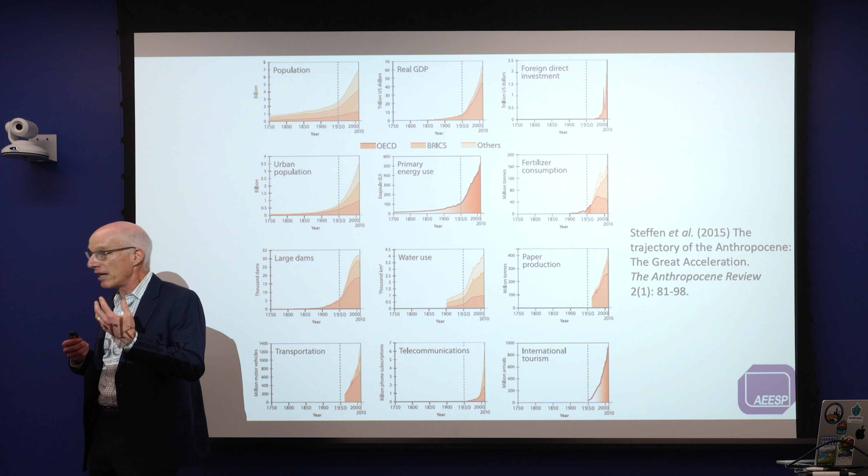But in the period in the start of the second half of the 20th century, we saw the pent-up economic growth, the technology development of the Second World War bloom. And it led to tremendous increases in global population. It led to the Green Revolution and food production. It led to technological advances, and it led to higher standards of living around the world.

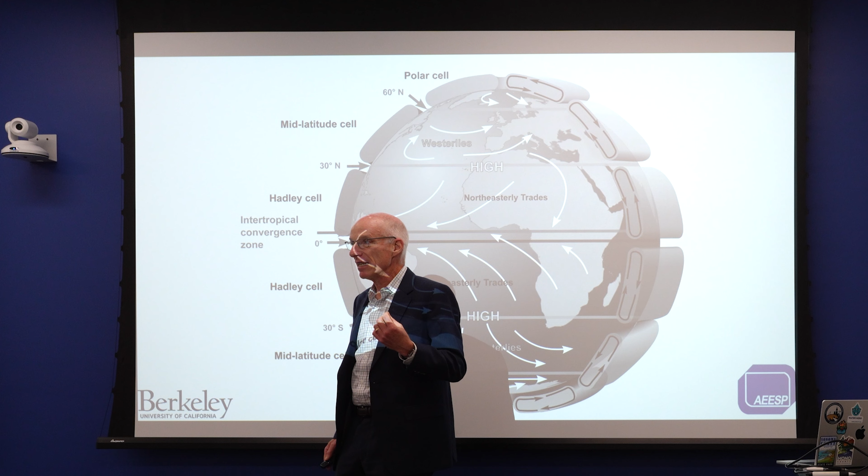And these 12 images from a wonderful paper that came out all the way back in 2015 is something that maybe should be in every introductory environmental engineering class, because it shows you what some of the drivers are. But what I really like about this particular version of these figures is it shows the fraction of it coming from the OECD countries, the wealthy countries, the BRICS, Brazil, Russia, India, China, and South Africa, the ones that have recently undergone economic development, and the rest of the world.

And I think it's important to think about this for many reasons. For example, our field of environmental engineering developed when the Great Acceleration was really at its peak in North America and Western Europe, when we were building tons of treatment plants and the populations of our cities were growing.

Now they're flatter, and we have to plan maybe for population decreases. Likewise, the BRICS have undergone a lot of that growth, and it's slowing down, and we can see that coming. But now we have this development in the rest of the world. And when it comes to water challenges, that has a pretty major implication, because the way in which our cities grow today is much different than the way it grew in the past.

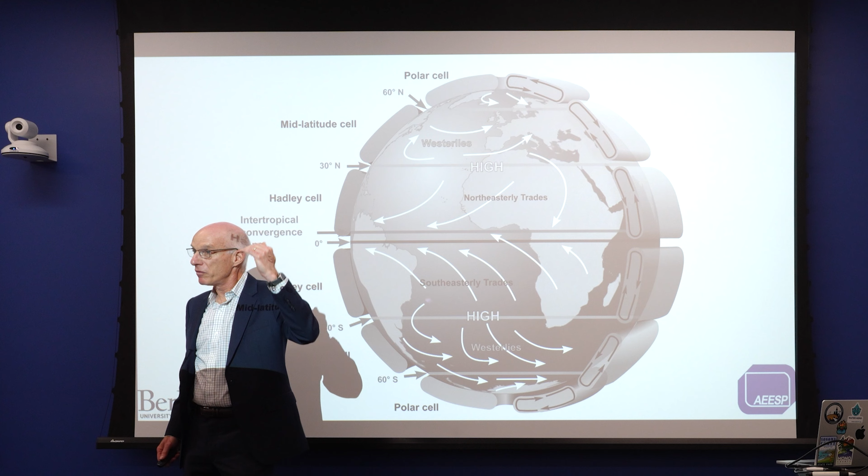For example, in the 19th century, London was the fastest growing city in the world, and it was doubling about every 40 years. In the middle of the 20th century, Los Angeles was one of the fastest growing cities in the world. It was doubling every 30 years. Today, the 10 fastest growing cities in the world are all in sub-Saharan Africa, and they're doubling at a rate of about once every 15 years.

And so if you think about what it takes to build water infrastructure, maybe 40 years or 30 years you could wrap your mind around. Now imagine the idea of doubling a city's water infrastructure in 15 years by putting in treatment plants and pipes and the kind of centralized model that we've used for all these years. Maybe it doesn't work the same anymore. And maybe we need a new approach, not just copying the approach that worked during the great acceleration in North America and Western Europe and the BRICS.

The second driver is climate change. When I was a student, when I was in your position in graduate school, we knew that climate change was coming, and we had a vague recollection that things would be warmer, but we really didn't see how it would manifest itself, especially with respect to water resources, until the last decade or so. And so maybe you've heard that idea, the wet places get wetter and the dry places get drier.

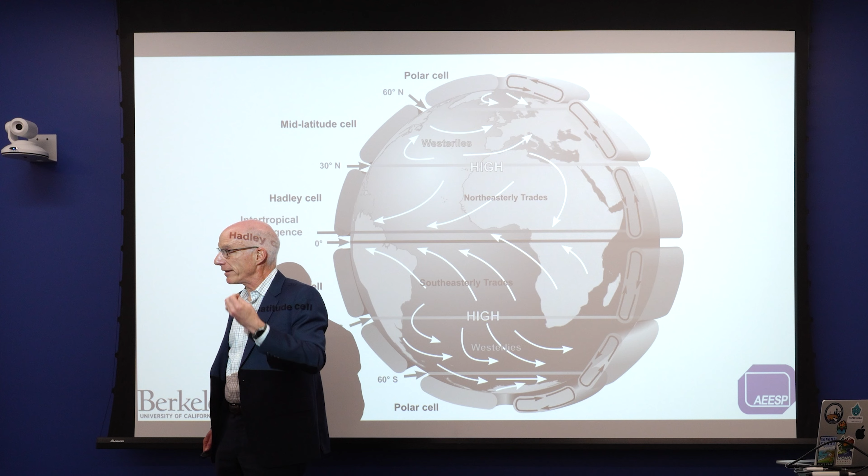Well, the thing that maybe brought it home to me was this junior high school drawing of the Hadley cells and the global circulation around the planet. You probably saw this in your first earth science class at some point. Remember that the solar radiation is greatest near the equator. We get the most evaporation of water. The moisture comes up at the tropics. That's why we have tropical rainforests.

It goes up into the troposphere, it drops the water, and it comes down at about 30 degrees north latitude and 30 degrees south latitude. That's why the great deserts of the world, the Sahara, the Sonoran, the Kalahari deserts, are at 30 north and 30 south. And as the planet warms, the width of the Hadley cells expands, and it gets drier in these places, or the deserts start shifting up in the northern hemisphere and down in the southern hemisphere.

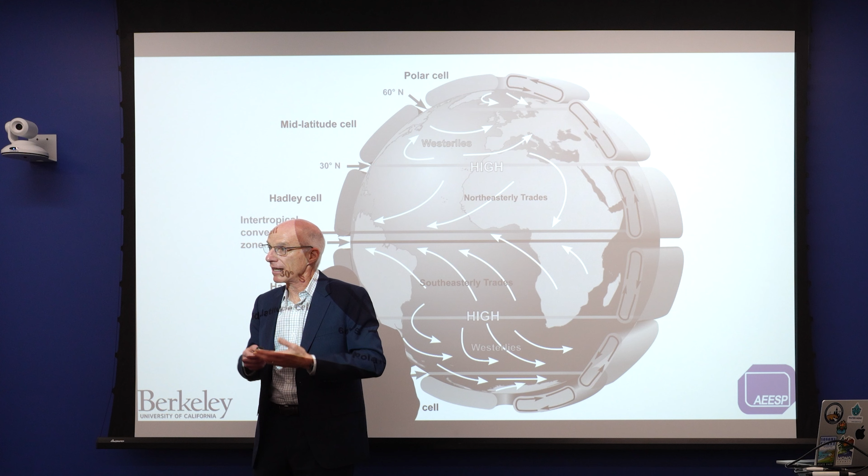So the climate of northern Africa is going to be the climate of the southern Mediterranean, and we already see it drying out. And the climate of northern Mexico is going to move into southern and central California and the American Southwest. And in Australia, the desertification is going to move the dry zones further and further south.

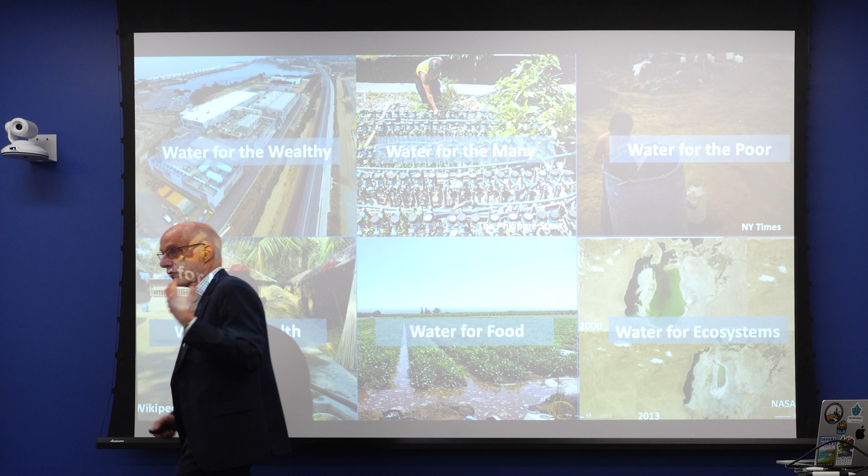Now, where this really started crystallizing in my mind was the situation in Perth, Australia, where in addition to the expansion of the Hadley cells, they've had changes in their ocean circulation patterns that have led to a reduction in precipitation sooner than in other places. So in Perth, they've had about a 15 or 20% reduction in rainfall relative to pre-development times. And that's more or less what we expect to happen by the year 2050 in the other areas on the edge of this climate zone where the Hadley cells come down.

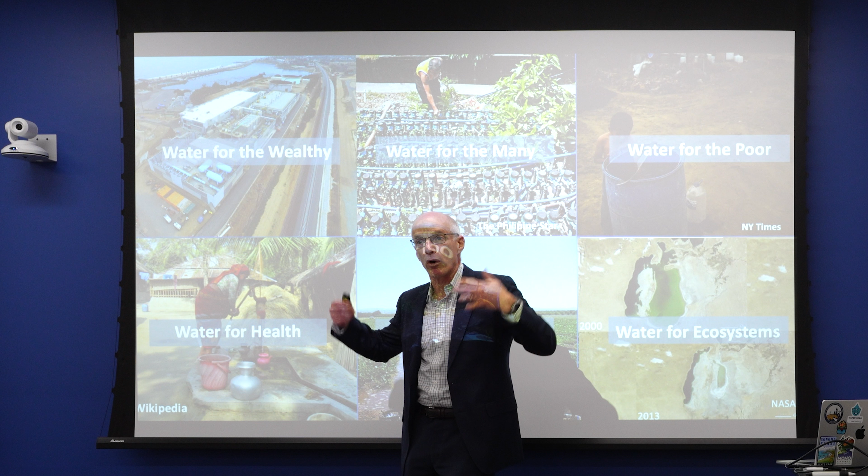But they've seen much more than a 20% reduction in water. They've seen in excess of a 50% reduction in the amount of water coming into their reservoirs. Because in addition to less rainfall, you have drier conditions, and with drier conditions you have higher rates of evaporation, and less of the rainfall that lands on the watershed makes it into the reservoirs. And when it gets warmer, the drying seasons get longer, and you get more evapotranspiration over a longer period. This general phenomenon we refer to as aridification, the thing that's behind the shrinking of the Colorado River here in North America. And so we can see the future happening in Perth.

And Perth is a very different place now than it was 30 years ago in terms of its water resources, because it no longer relies upon surface water. It relies upon seawater desalination and water reuse for the lion's share of its drinking water supply. So there's something big happening, and it's driving our field, and it's coming to us.

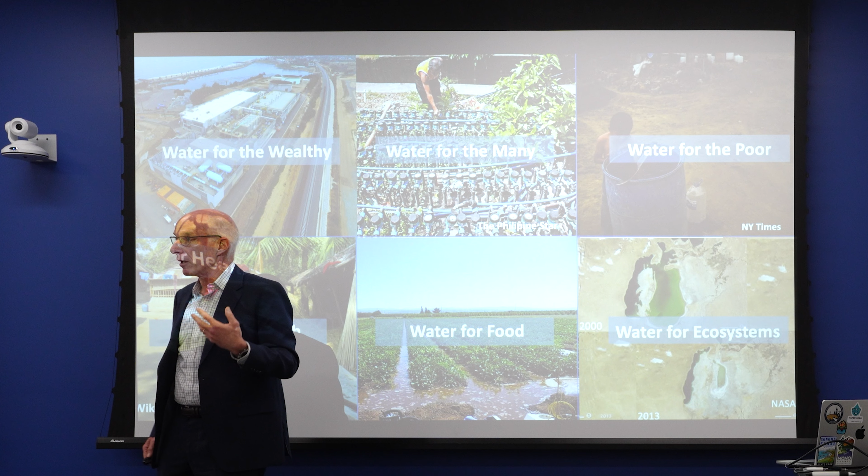And I've been thinking about what it could mean in terms of water challenges or water crises, and I really came upon this idea that when we think about water, we run from crisis to crisis, because when I think about how water systems change, they change in response to crisis, and that was really the lesson from Water 4.0.

So when I sat down to write Water for All, I thought about the 6 water crises, and the book is oriented around these 6 different water crises that we face, and they're driven by the great acceleration and climate change. But the institutions that deal with them, the technologies and policies we use in response to them are all somewhat different. So it's more helpful not to think about one global water crisis, but to think about 6 separate crises.

I don't have time to talk about all 6 today. I've chosen for this lecture to focus on drinking water and water supply, but I just want to review them quickly to give you kind of a teaser for it. So the top 3 are all about drinking water.

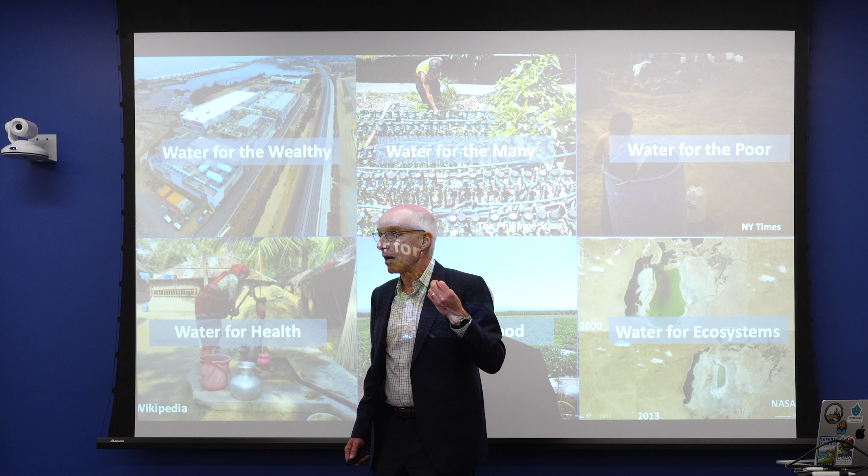Water for the wealthy, that's a picture of the Carlsbad, California, the San Diego seawater desalination plant, the largest desalination plant in North America. So when rich people run out of water in their cities, they call a multinational contractor and they build a desal plant, or they build a new reservoir, or they build a water recycling facility.

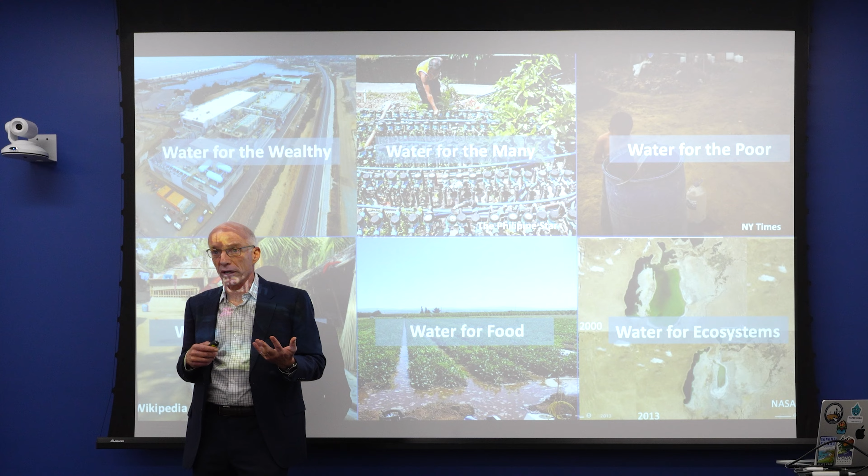Water for the many, this is a picture of a series of valves in Manila in the Philippines. Many of our cities, the majority of people who live in cities are served by piped water, but the piped water is both unhealthy to drink and not always available. So this is a water technician turning on and off different zones of the distribution system because they don't have enough pressure to pressurize and send the water around 24 hours a day. And this leads to a series of economic challenges as well as supply problems.

And finally, water for the poor. It's a picture of a child dipping water out of a barrel in Mexico City, where they have water scarcity in their informal settlements, but you see this problem play out all over the world, probably as much in rural communities as in cities, where people don't have access to piped water, so they spend a lot of their time, a lot of their money acquiring water. Mostly I'm going to talk about these 3 today.

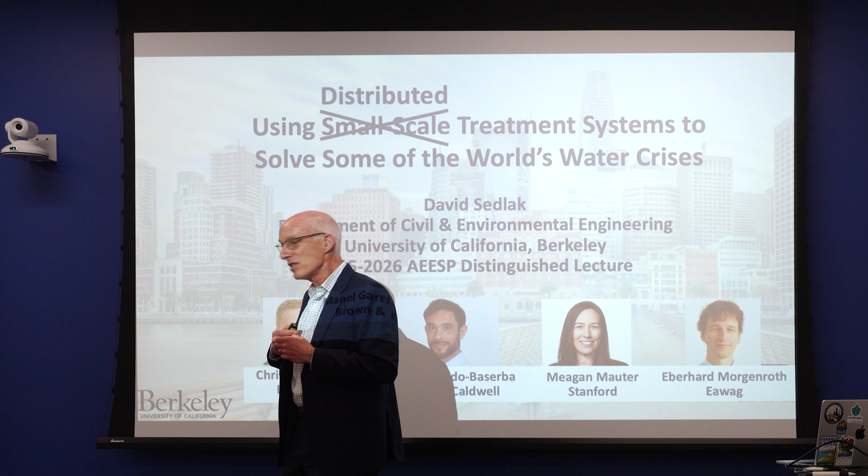The other ones, water for health. There's a woman pumping water out of a tube well in Bangladesh. You probably know about the global mass poisoning with arsenic as a result of a well-intended public health effort to reduce exposure to waterborne pathogens, which has people drinking arsenic, but it's not just people in low-income countries. There's plenty of people in wealthy countries who have unacceptably high levels of arsenic and nitrate and other chemicals in their drinking water.

Water for food, as a result of the continuing momentum of the Great Acceleration, we're going to have to produce 70% more calories by the year 2050. And so we're going to have a need for a second green revolution to increase productivity of food, and we're going to do it on more or less the same amount of land. There isn't much more farmland to clear around the world to feed all the people and to have people live at a higher place in the food chain eating more meat. We're probably going to do that by increasing the amount of irrigation and intensifying agriculture.

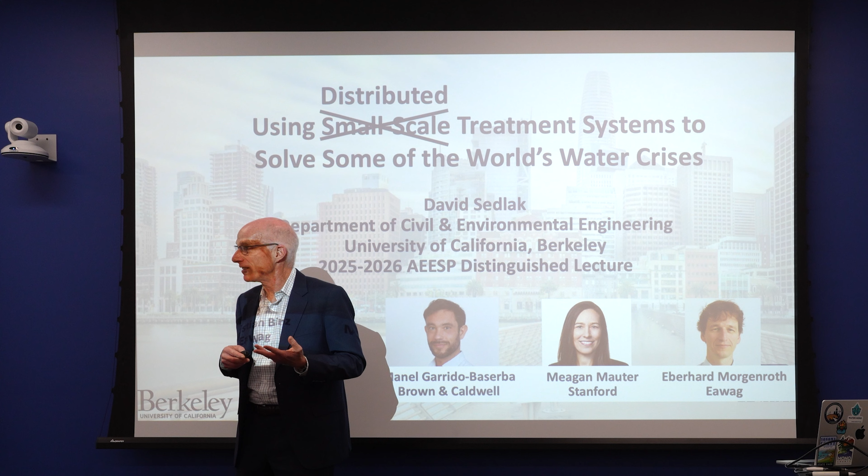And finally, nature always bats last, so here's a time-lapse series from NASA of the Aral Sea drying up. Because when we start routing water for agriculture, when we start sending water for our farms and our cities, we tend to dry up lakes. A terminal lake is like a worst case scenario where you can most easily see it, but many of our streams and rivers are heavily degraded as a result of our failure to be good stewards for water.

And so each of these is a crisis. And there are people and ecosystems and institutions grappling with them every day. And that's really the space we as environmental engineers inhabit when we think about water. But today I want to talk just about a smaller section of this.

And I want to talk not about the problem, but about one set of potential solutions to the problem. And it's this issue of small-scale treatment systems. And to help me with this, like I told you before, I recruited some co-authors for the paper. And the first thing my co-authors said is that I had the wrong title. So you can see why this paper is taking a long time.

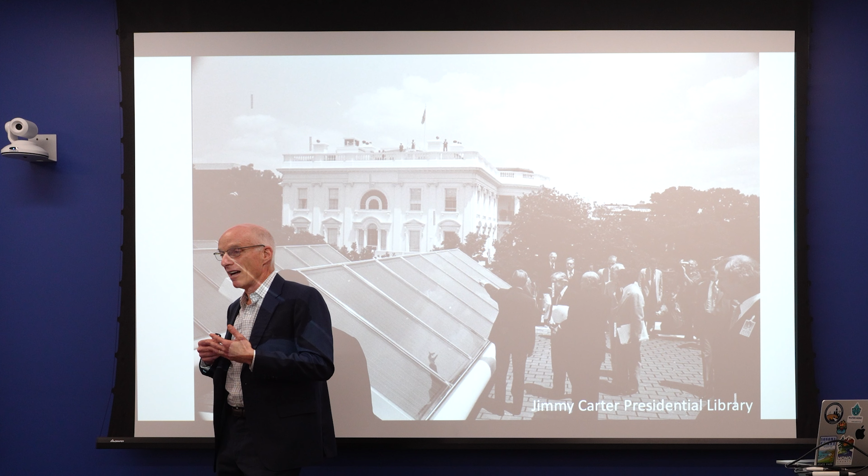My co-authors shown here convinced me that it's actually distributed treatment systems. So I'm not talking like small scale. Scale is not the issue. It's this idea that we can distribute treatment systems around our cities and not rely upon this model of a centralized wastewater treatment plant and a centralized drinking water treatment plant, but we can build water recycling systems in the basements of our buildings, in our homes, in small residential developments that people start, and that this could be part of a solution, not the only solution, but a new solution to water scarcity.

So my co-authors: Christian Binz, a social scientist at Eawag, who I've worked with in the past on issues of public acceptance of potable water reuse. Manel Garrido-Baserba, he's currently at Brown and Caldwell, but he had been at the University of Verona. That's where I met him. He's a great modeler. Meagan Mauter, Nick's former advisor at Stanford, and Eberhard Morgenroth, an engineer from Eawag also, who does a lot of this work. And these have been my partners looking at this and working on it and thinking about it. And the reason it's taking so long to write the papers, we're having so much fun doing it. So I don't mind that, but at some point it's got to go.

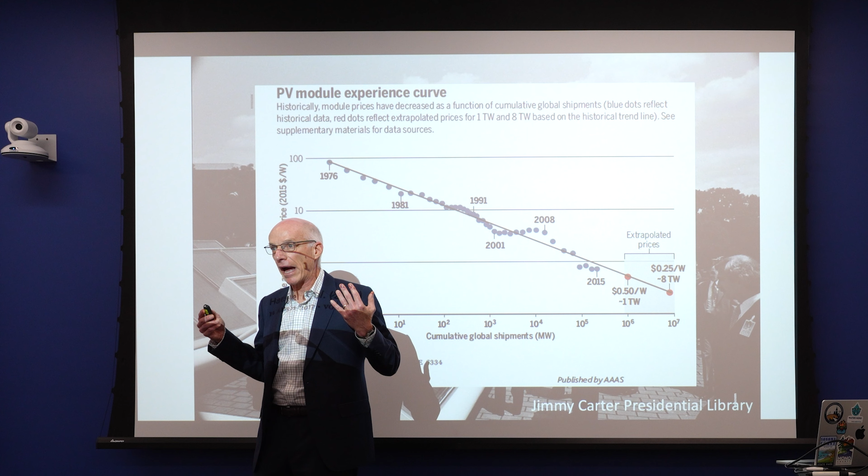Okay, so I'm going to take you someplace now where you probably didn't expect me to go. It's the roof of the White House. And maybe you can recognize from the clothing that this is not the current White House. You could probably also see the West Wing there. This is the White House circa 1976. And in front of you is Jimmy Carter, and he's pointing to his solar panels. Very proudly, his solar panels that he's put on the roof of the White House, because Carter recognizes that the key to national security is breaking our reliance on oil.

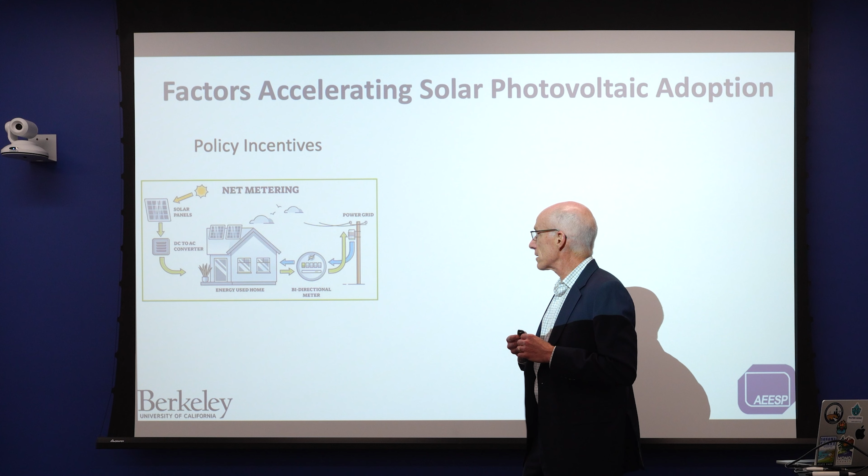He has some inkling about climate change. He realizes that having an alternative, non-fossil form of energy might be a good thing for the country, and so he pushes this. Now, because people don't like someone who seems like a Puritan who asks them to make sacrifices for the better good of the environment and the nation, he loses the next election to Ronald Reagan, who takes the solar panels off the roof of the White House. But Jimmy Carter has the last laugh, because between 1976 and I guess 2017, when this paper came out in Science, the price of solar electricity dropped by a factor of 50.

And this phenomenon that with new technologies, when they first come out, they're expensive, but as they develop and more units are built, they drop in price due to something called learning by doing and economies of scale. And this is something that if you went to business school, you'd hear about all the time. It's called Wright's Law. And Wright's Law says that as we build more of something, as we gain more experience, it gets easier to do and it gets cheaper to do.

And I would like to suggest to you today that some of the things I'm talking about, these distributed water systems, which today might seem a little far-fetched to you, or might seem like they're not economically attractive. First of all, I'll tell you that they're already economically attractive. But they're going to get cheaper and cheaper and cheaper. And the conventional way of doing water that we've done since the beginning of the Great Acceleration is not going to get that much cheaper. So it's going to win in the long run.

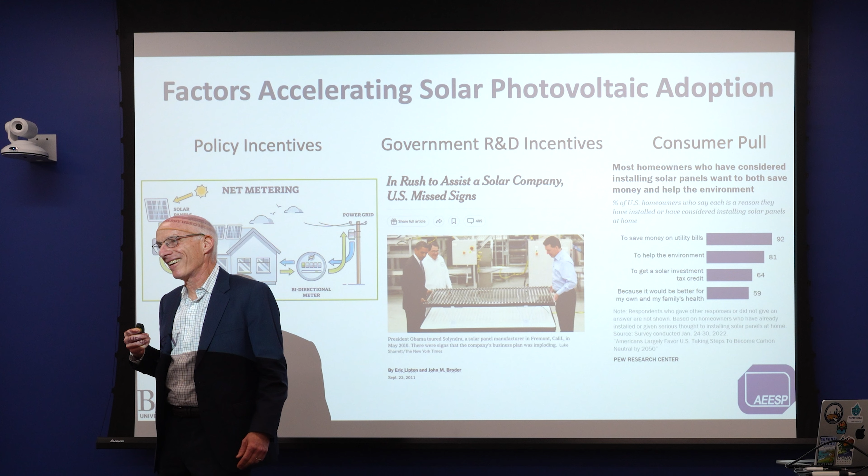But I also want to help you to think about something that maybe we don't teach our environmental engineers enough. And this idea that when you think about change, you have to have a theory of change, and you have to be a little bit of a student of change, and you have to think about how it happens. And when you look at something as complex as energy or water infrastructure, you got to be a patient person, because this takes a long time. Let me tell you something about solar panels, some of the ideas underlying that figure.

We made solar panels happen for a variety of reasons beyond just the technology. So if you thought that the reason that solar panels got cheaper was that the efficiency of the photovoltaics improved over time, that's a very small part of the story. We did things like having policy incentives like net metering, requiring utilities to accept the electricity that consumers generated and paying them for it. In Germany, we had the Million Solar Roofs project, which encouraged people to put solar on top of roofs, and that had a big impact.

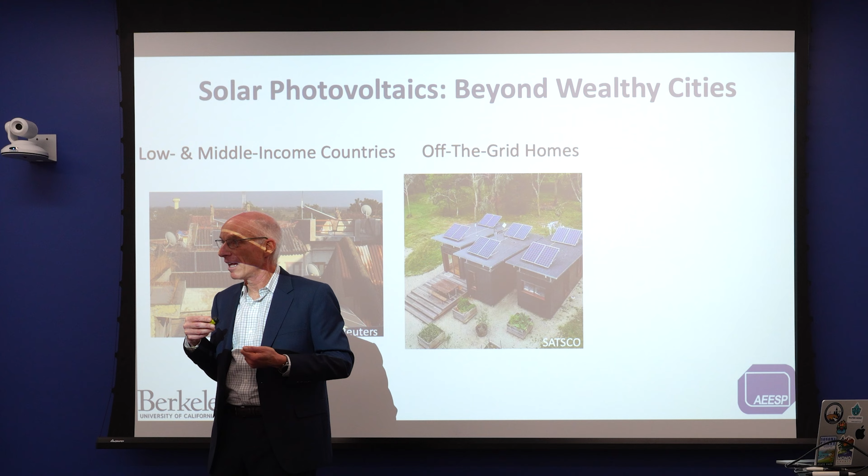We also engaged in something called subsidies. So we subsidized industries to grow them. The one that I recall most starkly is the one that President Obama got in trouble for. It was the US DOE loan to a company called Solyndra that went out of business. And he was given a lot of grief over it. But the idea behind that program was to create an industrial policy in the US that would subsidize the development of solar photovoltaics. Maybe Obama failed, but the Chinese government succeeded, because they built an industry that builds cheap solar panels and solar photovoltaics now that makes it possible.

And then finally, once the consumer sees what it's like to have solar on their roofs, they want it and they want more. So this is from the Pew Research Center, and they surveyed Americans about solar panels, and they're totally into it because it feels good. How many of you have solar at your house? I knew you'd have solar. I have solar. I was cynical for years.

I would tell my wife, look, we've got to get insulation and new windows and do all of the things that we need to do before we do this showboating thing of putting solar panels up. But man, the week our solar panels went up, I was so proud every time I went home and looked at them, and I looked at the metering thing coming out. So this is like the human behavior of feeling good about producing your own power and not being part of a system that might be bad for the planet.

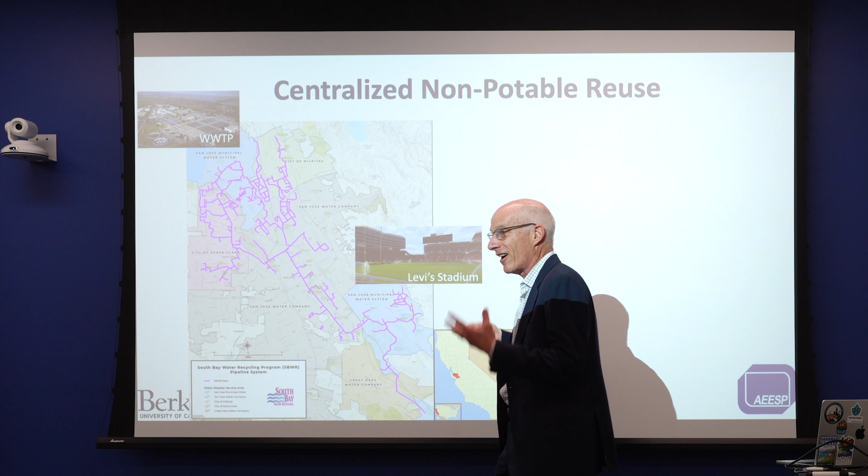But it has impacts beyond wealthy cities. So if you go today to low and middle income countries, you'll see that people have repurposed their solar panels. I have a friend who teaches at American University of Beirut, and if you remember when the fertilizer factory blew up and the electricity plant stopped working, no one had electricity. Well, he built a solar array on his roof and made a microgrid for his apartment. And now most of the middle income and upper income people in Lebanon have their own electricity without a utility, but through this distributed system.

So these things get repurposed in ways that not just make sense for wealthy people living in wealthy countries, but make sense for people who have infrastructure that can't serve their needs. The whole movement towards off-the-grid homes. You've seen maybe the last few weeks these articles about balcony solar, that you can just plug it into your house and produce your own solar. If you haven't seen it, Google balcony solar. You'll see that this stuff is getting smaller and smaller and cheaper and cheaper.

And then finally, human ingenuity, because people are very creative, and once these technologies exist, they'll find new ways to apply them, whether it's a school child reading at night because they're able to charge a battery and have a light at night, or making a little business out of charging people's phones. You just can't imagine the ways that technology gets repurposed.

So let's turn it around and start thinking about water. Now, I want to give you a little bit of a primer on water recycling, because I'm thinking about water-scarce cities and how they're going to get water in the future. And if you look at the history, or you look at what most engineers think right now, they would tell you that the way that we do this is we recycle the wastewater from our sewage treatment plants, but we use it for non-potable purposes.

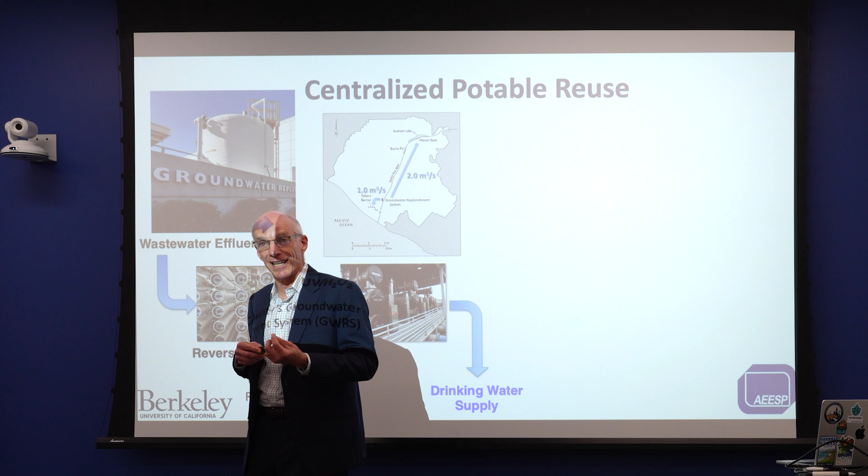And this is a great example of it from near me. This is called South Bay Water Recycling, this project. It's in the southern part of the San Francisco Bay, San Jose, Silicon Valley. You might have heard of the place. And here are the purple pipes. So the wastewater treatment plant is up here on the edge of San Francisco Bay. And this is the purple pipe network that sends the water all around, including to Levi's Stadium, where if you watch the Super Bowl, that beautiful green grass that everyone was bleeding on, that was watered with recycled water from that project.

So it seems like a great way to do it, but it's turned out actually to be a dead end. And the reason is that for this particular project, they had to construct 150 miles of new pipes to distribute that recycled water around. You can kind of see them here. And it only is reusing about 5% of the wastewater produced by the treatment plant. That's because you can't force people to take it.

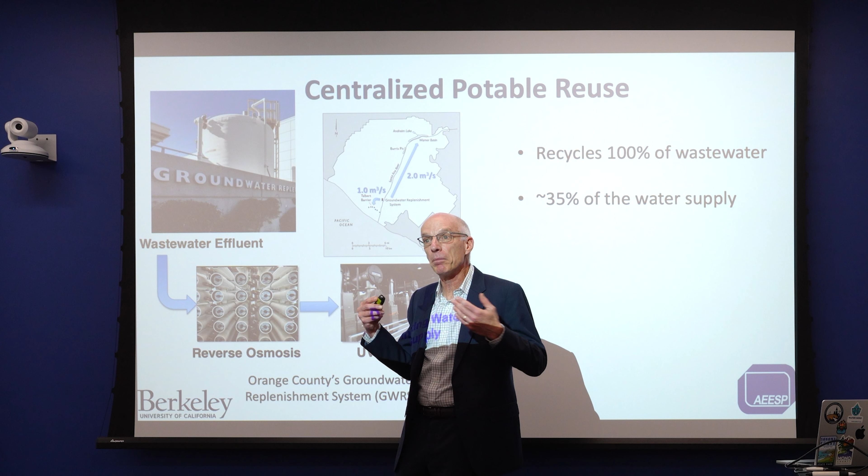The projects where these turnouts are going and all these pipes are going are like office parks and Silicon Valley tech parks and football stadiums and ball fields, but not individual homes. So you have to build a lot of pipes to use the water. So it's in irrigation and industrial usage. And when you look at the cost of the water, they don't like to talk about this, but if you dig deep enough into their material, you can see it's about $1.50 a cubic meter, which is up there with the cost of desalinated seawater. It's pretty darn expensive. So as a result, we're probably not going to see much expansion of this.

So in California, where we've been through this drill of water recycling, very few people are enthusiastic about non-potable water reuse. There's some agricultural reuse, there's some opportunistic things. So if you're a golfer and you get lost and you can't find the golf course, you look for the sewage treatment plant because the golf course is right next to it. But that's because of the proximity, and it makes it easy. You don't need that network.

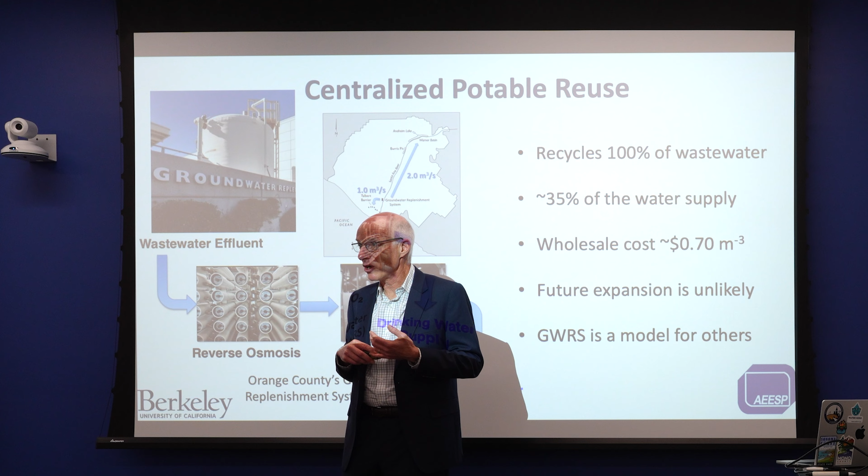So the alternative that's gotten a lot of attention lately is this idea of centralized potable reuse, where you take the treated wastewater from the sewage treatment plant, you put it through ultrafiltration or microfiltration and then reverse osmosis. Then, for good measure, you whack it with an advanced oxidation process, usually UV peroxide, and then you inject it into the aquifer, like in Orange County. This is the famous groundwater replenishment system, kind of the oldest of these systems.

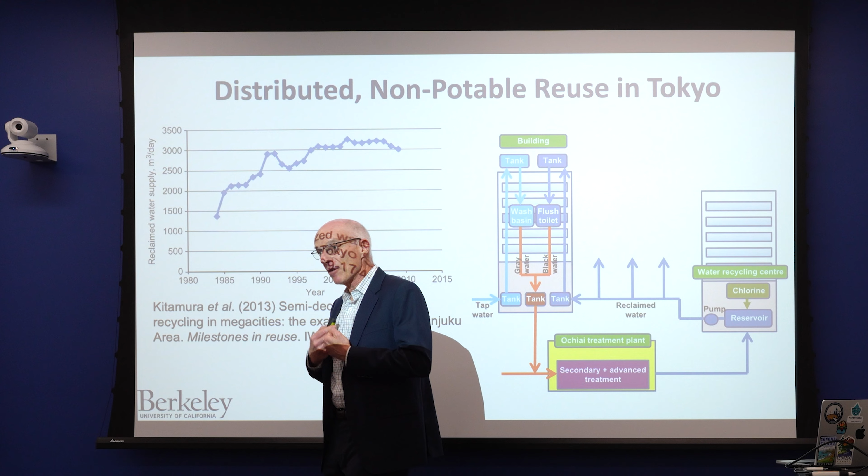It started with a seawater intrusion barrier to push back the seawater that was coming into the aquifer, but some of that water was going into the water supply. And then when they expanded it, they pumped it up to, you can see Anaheim Lake up there, the edge of Disneyland. And they infiltrated it into a lake, and it recharges the aquifer. So if you go to Disneyland and you turn on the tap, you're drinking recycled water, and it tastes much better than the water here at Notre Dame, because it has a low salt concentration.

And that project is quite effective because essentially they've recycled all their wastewater. There's no more wastewater left at the Orange County Sanitation District. They had to build this giant tank, I should have gotten a picture of it, to hold the wastewater that flows in during the day so they could equalize it and run the treatment plant at its full capacity. So every time I see the people from Orange County Water District, they go, do you know where we can get some more wastewater? So this is very successful. And it accounts for about 35% of the supply of people in their service area.

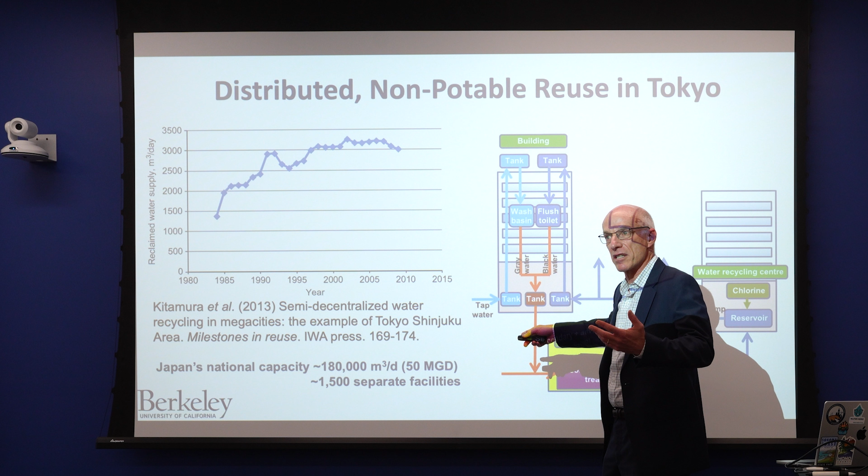Because it's Southern California, people are going to have lawns and outdoor irrigation. So they lose 15% of the water during the RO process because they run it at a recovery of 85%. And then about half the water is used outside. But that's still pretty good. It's a substantial fraction of their water resources, and it's a drought-proof fraction of their water resources because wastewater volume doesn't decrease during droughts. The cost is about 70 cents a cubic meter, about half the price of that Purple Pipe project in San Jose. And its future expansion is unlikely because they've already recycled all the wastewater. So it's serving as a model for others.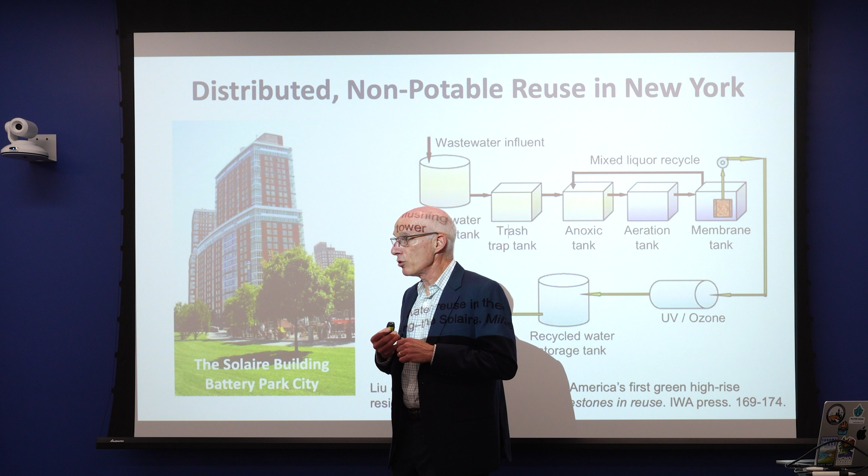And so the city of Los Angeles is in the process of spending somewhere around $40 billion to build a water recycling system to recycle all of Los Angeles' wastewater. The city of San Diego is in the process of building a series of treatment plants to recycle all of its wastewater. If you go out to Phoenix or Atlanta or outside of Washington, D.C., or into Denver, that's the way things are going. Billions of dollars being spent on centralized water recycling. But you know what? We're going to run out of opportunities there, so we're going to have to look other places.

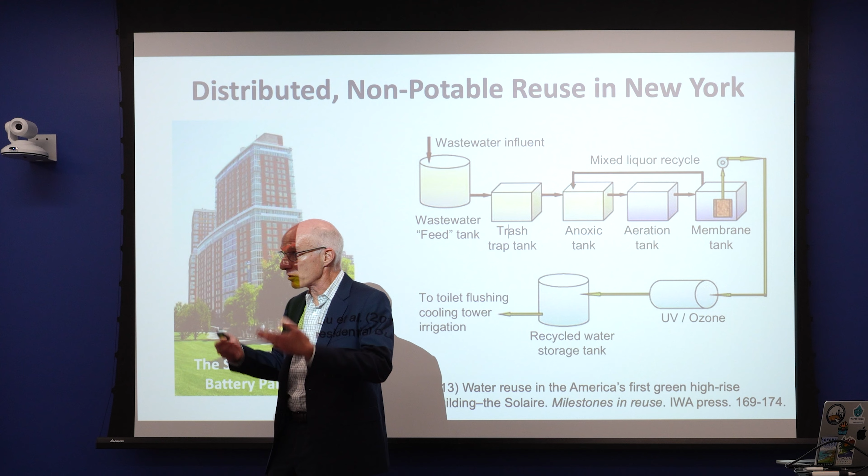And the place that we're going to look is in distributed water systems. And I want to tell you a little about how distributed water systems developed. And to do that, I want to take you to Tokyo. So here we are in Tokyo. And in the 1980s, they had a series of droughts. They also were quite worried about their vulnerability to earthquakes, because during earthquakes, we often lose the ability of our water treatment plants to distribute water.

So they started building these building scale water systems where in an area they would have kind of like a district scale wastewater treatment plant, and it would use things like very simple wastewater, like little mini activated sludge treatment plants followed by filtration and chlorination. They'd send the water back into the building and it would be used mainly for toilet flushing. Sometimes they did rainwater capture too for hand washing.

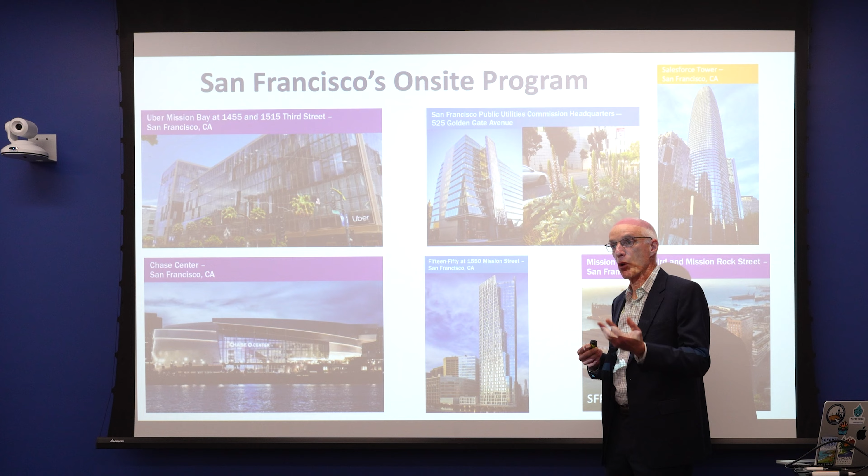But this became very popular in Japan to the point where, let's see, today the total capacity, do I have it on? Yeah, I have it here. I don't even have to look at it in my notes. They have about 180,000 cubic meters a day, or 50 MGD. So that's like a moderately large city's wastewater treatment plant amount. And they have today about 1,500 facilities operating.

So if you see membrane bioreactors, for example, one of the places membrane bioreactors got a hold in the market was this market serving buildings in Japan. So this is kind of the thing that gave people confidence that you could have distributed wastewater treatment at the building or district scale, providing a safe water supply for buildings.

And this was inspirational to a company named Natural Systems Utilities that advised a developer in New York, the developer of the Solaire building project in Battery Park City, and encouraged them to put in a building scale water recycling system in the early 2000s. And the neighborhood that it serves has about 10,000 residences and about 25,000 people using the commercial spaces in this area of Lower Manhattan.

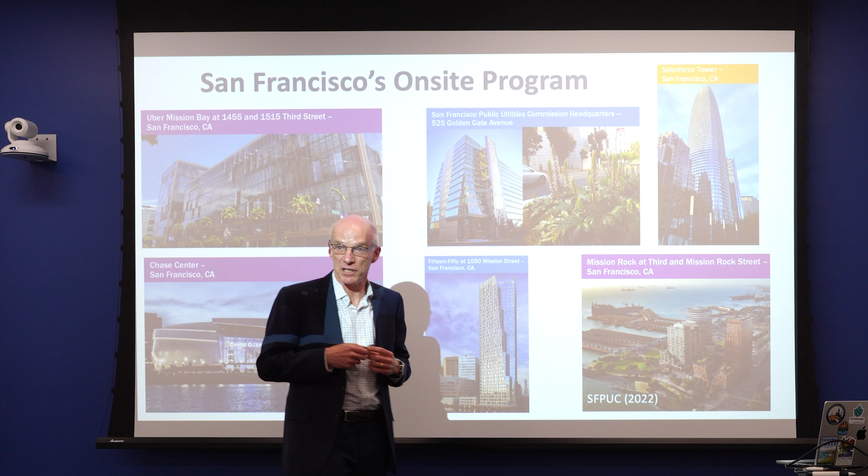Now you think about New York City, you don't normally think about water scarcity, but the project was motivated by New York's antiquated combined sewer system. And the idea behind this building was that when it's going to rain, it can hold its bladder. It'll hold on to that water and recycle it and not discharge it to the sewer, so there was a lower probability of combined sewer overflows. And because it was beneficial to the city's objective of minimizing CSOs, they qualified for subsidy.

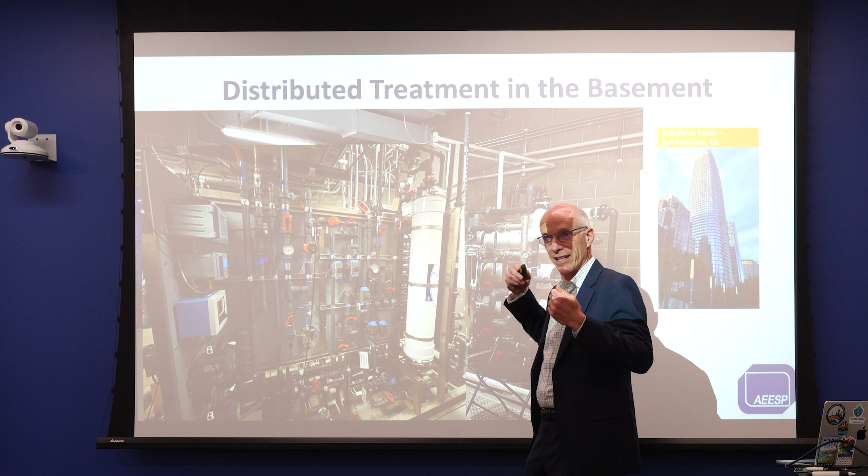And then because New York City in that period, I think that's the Bloomberg period, wanted to have more green buildings, it also got something there. And this project is very interesting because it had a favorable return on investment within 10 years, because of the subsidy and because the people living in the building were buying less water from New York City's water department. And so they were saving money.

And this project encouraged my city of San Francisco across the bay from me to adopt a series of requirements in 2015 that new large buildings in the central business district would be required to install in-building water recycling systems or rainwater capture. Now, rainwater capture on the roof of a building in San Francisco is kind of silly. It rains twice a year or something like that, and it rains hard, so it quickly is done. But in-building water recycling really took off.

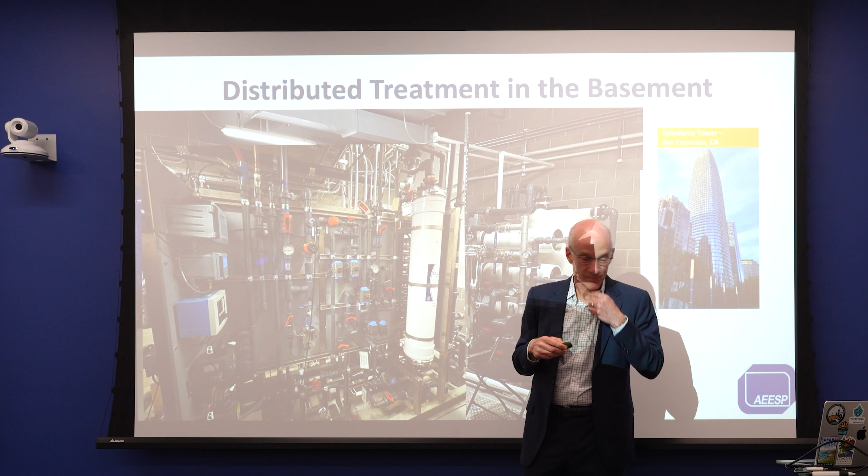And in 2021, they increased the regulation and said that any building of 100,000 square feet or larger, basically like new apartment buildings in this central area, would have to have these systems. So as a result, we have about 45 permitted projects operating in the city, and you can see pictures of some of them here, and about 30 that are in the planning stage.

San Francisco got very lucky too. This ordinance corresponded with our most recent real estate bubble. We're gold rush, right? We're boom and bust. So now it's AI, and we'll build some more buildings in a few years, and robots will kick us out of the city. I don't know what will happen, but you see these buildings going up, and so they put in this regulation at a time when there was a lot of money around, and so someone who's going to live in one of these fancy condos doesn't mind spending another couple thousand dollars for their multi-million-dollar condo because they like the idea that the water is recycled and that they're part of a green building.

I want to take you inside of one of them. This is the Salesforce Tower.

It's the second largest building in the western half of the United States, and it has in-building water recycling. Here it is downstairs in the basement. So it recycles essentially all of the wastewater produced in the building. So you see the membrane bioreactor in front of me. Yeah, that's the MBR. No, I'm sorry. You're seeing the RO system here.

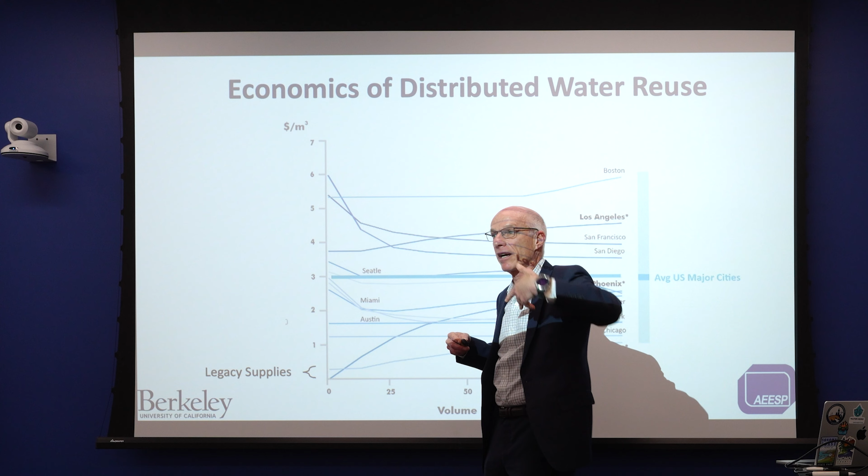Here's the RO skid, and there's the UV peroxide system. And here's the membrane bioreactor. I couldn't take a picture of the whole thing. I didn't have a fisheye lens on my camera, but it fits in the elevator. So this takes up maybe the equivalent of 4 parking spaces in the basement of the building.

And the cars parked down there in the basement of Salesforce Tower, man, those are cars. So those are valuable parking spaces, right? Lamborghini, Maserati, et cetera. But they did it because Mark Benioff wanted clean water. When people flushed the toilet, he didn't want the water to be yellow.

And so they do reverse osmosis and UV peroxide, and the water is only used in the building for toilet flushing and cooling towers. But it gives me a lot of confidence that you can operate a system like this in a building because it's been operating now for 4 or 5 years without any problems.

So what I'd like to do is think about, okay, people do this as a stunt, or they do it because a crazy city like San Francisco requires it, but does it make any sense? And to do this, we've done an analysis of the cost of water. And we don't often think about the cost of water.

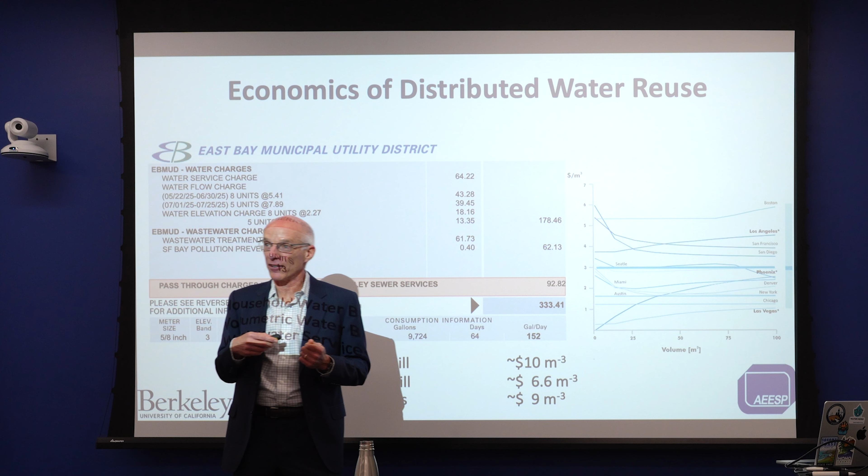We normally think about what it costs a utility for water, but I want to talk about what it costs the consumer. And so when you get a bill, you pay for water, and usually your bill depends upon your usage, basically the volume of water that you use in a month, and in most places, the more water you use, the more expensive it gets, because you're trying to give people reasons to conserve water.

But it's a little more complicated than that, because to operate a water system, the most significant cost is the cost of maintaining the infrastructure. So it shouldn't really be this way. We make this artificial distinction where we try to put in conservation incentives, but it should be flat, or it should even be in the other direction. We should have a very high hookup fee for water, and it should go down from there. Not too many cities do that.

I guess San Diego and San Francisco kind of do this, but you can see that the average cost of water to the consumer is about $3 a cubic meter. Now, what does it cost the utility for this water? Well, the legacy supplies that our great-grandparents and grandparents built during the Great Acceleration are already paid off, so maintaining them is pretty cheap.

5 cents to 25 cents a cubic meter to keep the Hetch Hetchy system flowing water that they're taking from near Yosemite Park down to San Francisco. And by the way, it's generating electricity on the way, so it's a pretty cheap system to operate. In most big cities, the water is really cheap. Pumping groundwater too is cheap, especially if you don't chlorinate it.

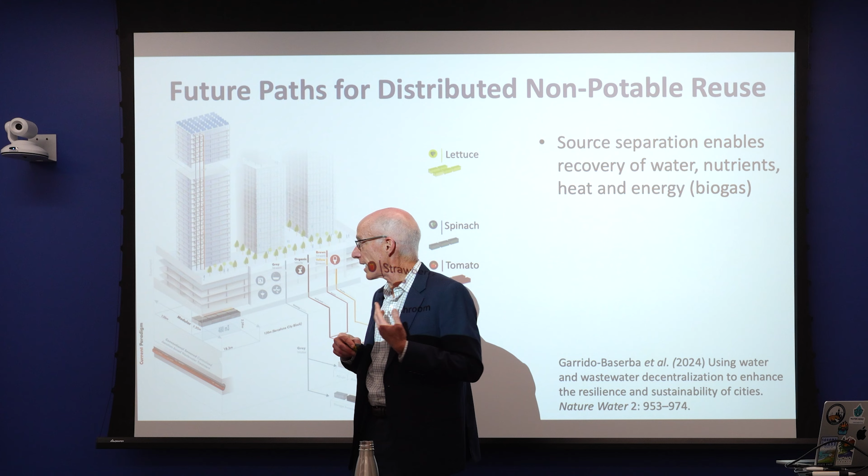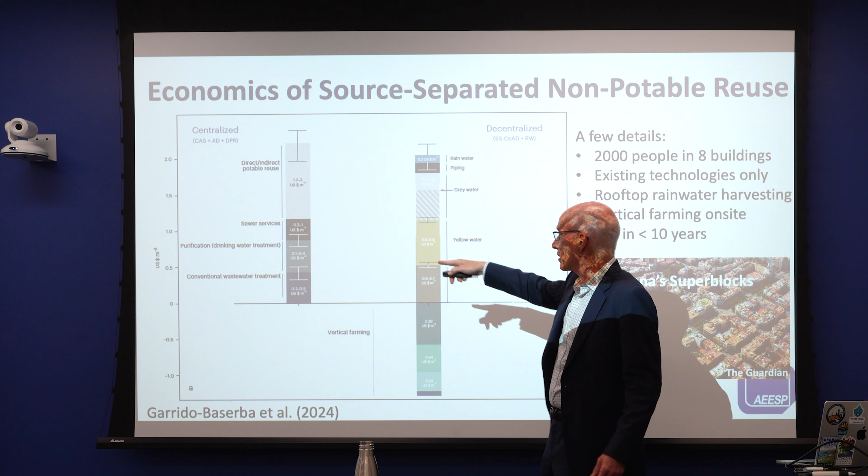Remember Wright's Law, right? These things are in the early stage. There's no economy of scale, not too many of these being made, but it's about $4 a cubic meter. And so if you live in Los Angeles or San Francisco or San Diego, it's already looking pretty attractive to you. If you live in Berkeley, where I live, this is my water bill, it's very attractive, because I calculated it. My bill, I'm paying about $10 a cubic meter total.

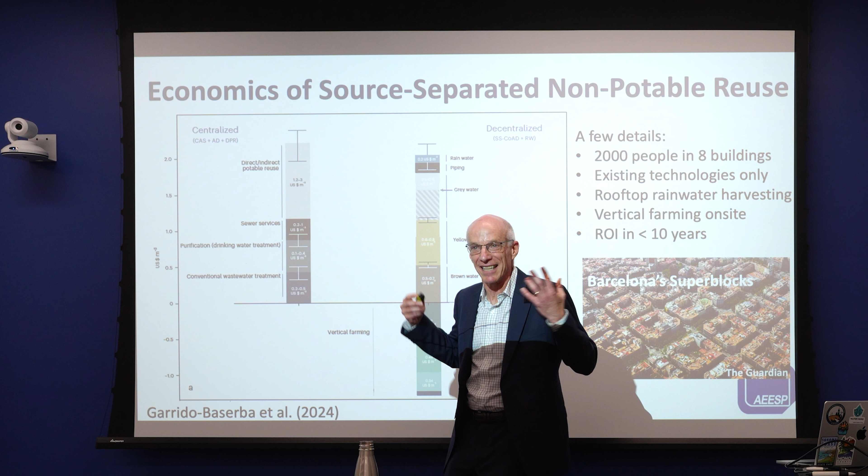The part that's volumetric is about $6.60 a cubic meter. And that's not even accounting for what I pay for my wastewater service. It's about $9 a cubic meter. So you can see, for me as a consumer, if I could install a distributed treatment plant and pay as much as what they do in San Francisco, I'd be very happy because it would pay for itself in only a few years.

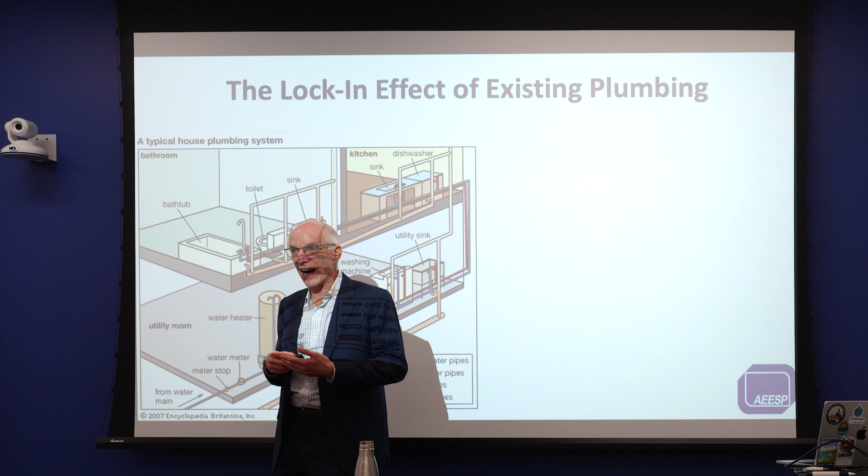So with this in mind, it really inspired me to start thinking about this topic. And my friend Manel is way into thinking about a future of green infrastructure. So Manel said to me, I want to do a model, an economic model, a techno-economic model of a building that does urine source separation and fecal waste separation and uses it for vertical farming to grow food on the side of a building.

And I want to compare that to what it would cost to do a centralized water recycling system. I said, well, okay, you're European. I excuse you for being excited about urine source separation. I don't really believe in it, but let's see this exercise through.

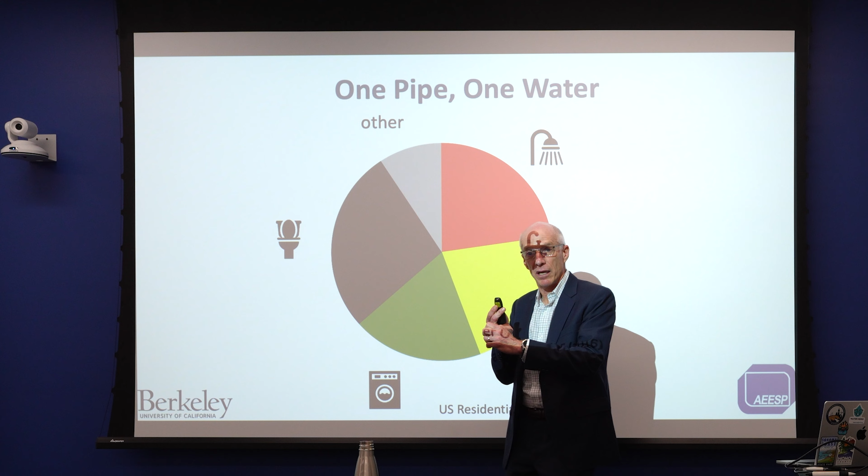So we published this paper a couple years ago, and we saw that source separation enables the recovery of water, and you can have nutrients. You don't have to bring in much nutrients to grow your food. You can make heat and biogas from the solids that you get. Vertical farming helps offset the cost of building the system because it's food that you would be buying from the grocery store. You could even sell it at a little farmer's market. And this idea of community engagement might really be inspirational to people.

And so if you read the paper, you can see figures like this. I'm not going to go into great detail, but what you can see in these bar charts here is a comparison of the techno-economic model that we made of this. You can see a centralized water recycling facility at the city scale. We estimated somewhere around $2 a cubic meter because we were also accounting for the wastewater services part. If we did the same thing with vertical farming, it's about the same price, but when we account for the produce that we're making, it drops the price and makes it competitive.

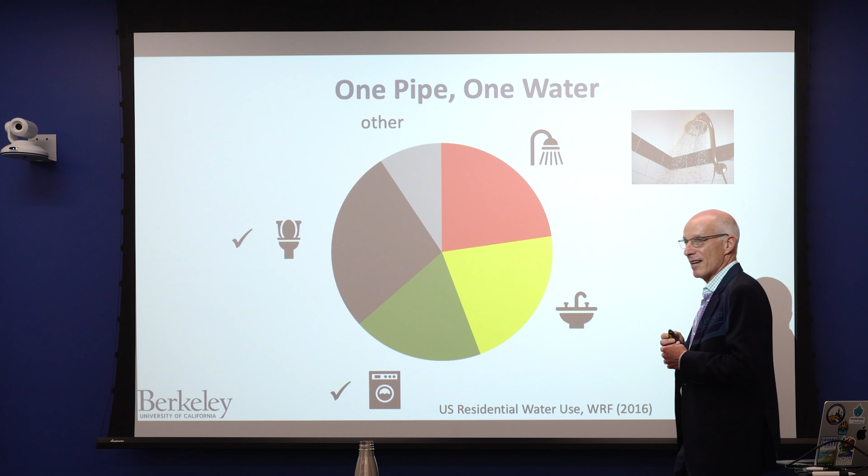So I said, that was kind of a fun exercise, the kind of thing that you can publish in Nature Water because they like something that seems flashy. And Manel makes these beautiful graphics like I could never make, so okay, that was fun. But I said to him, this isn't the way the world works, my friend. I've never been in a house that has a yellow water line and a brown water line and a black water line. I live here in a house that has a hot water and a cold water and a sewer line.

And now at this phase of the Great Acceleration, our housing stock is mostly built. So in San Francisco, it's 1 or 2% of the buildings turning over a year. So I'd have to wait a century to have an opportunity to replace the plumbing in all the buildings. And by that point, our population's probably shrinking. So we've got to think of something different. We've got to think of a way around this. And so, again, population growth is shrinking.

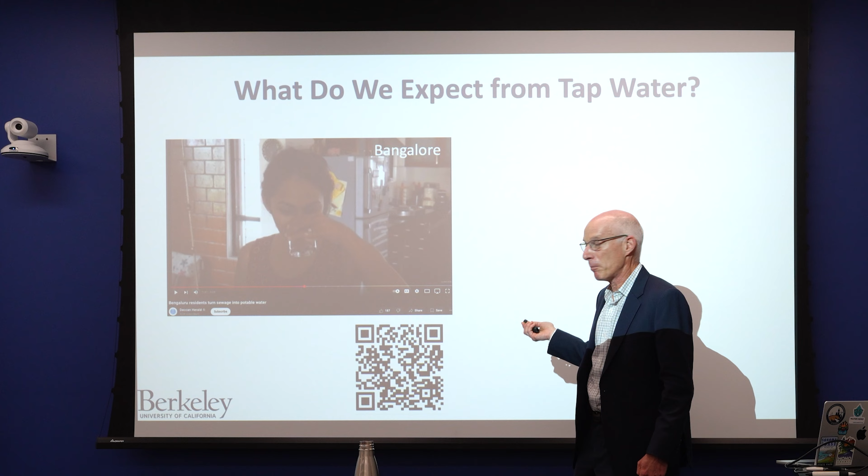Dual plumbing retrofits, we did the calculations. If you retrofit a building with dual plumbing, because that's what you need for non-potable water recycling to flush toilets, it increases the cost by about 60%. Versus if you install it in a new construction, it's only about 10% more expensive. And so I really think it's a kind of fun thing for architects to look at, but it's not the kind of thing that I think is going to scale and scale quickly in the way that we need to solve water crises. So I think about this idea that we have one pipe in our buildings, and we want to embrace the concept of one water.

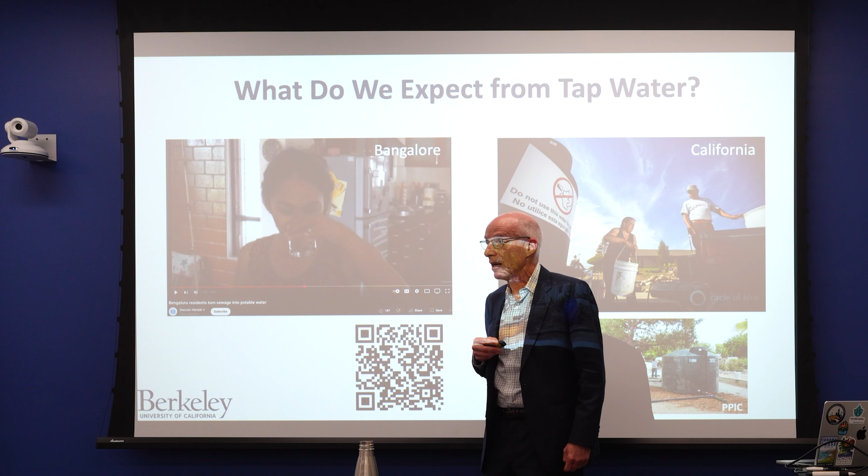And if you think about it, recycled water, like if I put a membrane bioreactor and an RO UV peroxide system in your basement, you, like Mark Benioff, would say, yeah, I could flush my toilets with that water. It's good enough for my toilet. And you'd probably say, yeah, it's good enough for my clothes washer. Right? It's demineralized, it's been disinfected, it's pretty good. But I'm not so sure about these other ones. Showering, do I want to shower in it? Is that a risk? Do I want to wash my hands in it?

Do I want to drink it? Do I want it for my food production? And I thought about this because I've been around and around in this whole discussion about centralized potable reuse. And we think about log reduction targets, and we think about trace organic contaminants that might sneak through the membranes. I've been doing that for the past 20 years and arguing about microbial risk assessment and NDMA and all these other kinds of things. And I started thinking about the question of what we really expect from our tap water.

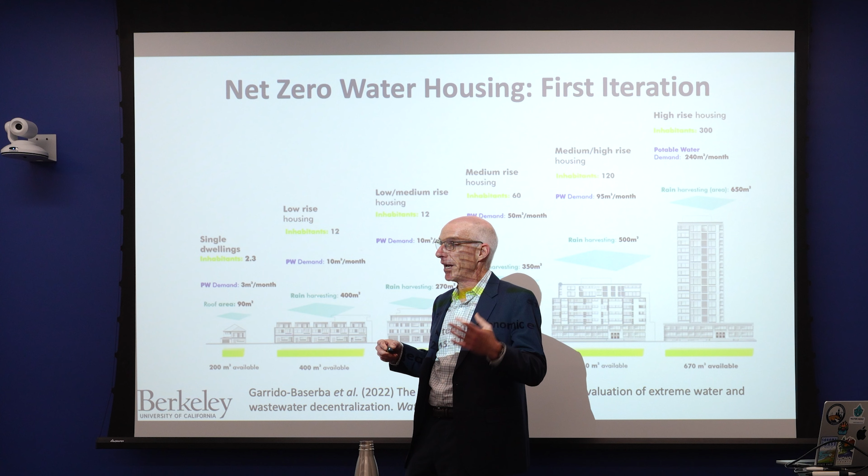And if you live in San Francisco or Chicago or New York, you expect some pretty darn nice tap water. You expect it to be palatable and safe to drink. But if you live in Bangalore, you maybe don't expect to be able to drink the tap water. So if you want, you can scan the QR code and watch a YouTube video about an apartment building in Bangalore where they're already doing this.

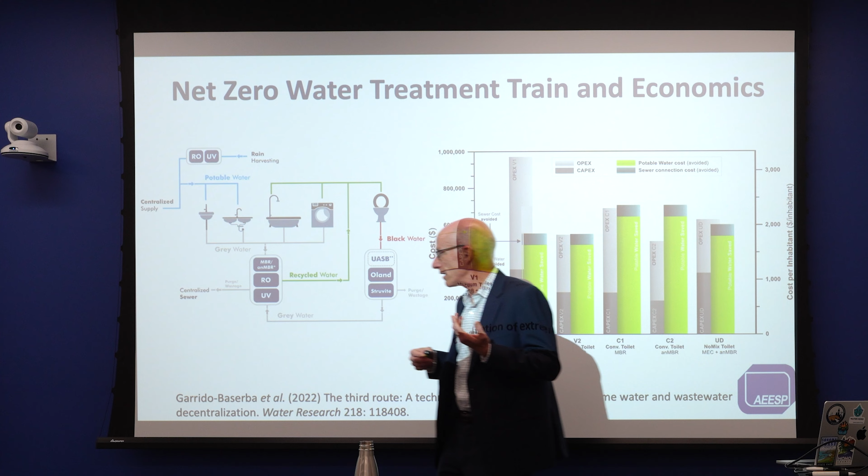They have an RO unit, and it's coming out of the pipes, and here's a woman drinking it, and there are a number of these buildings that are already in existence, and that's because Bangalore has grown so quickly, they can't keep up with producing enough water for people, and the centralized water system stops working for part of the year. And so they've told residential developments that they have to provide their own water, and this is one of the ways that people are taking it into their own hands.

Or closer to home, we can look at rural America, and this is California's Central Valley, where a number of people during the last drought lost access to their groundwater wells because the level of the water dropped as farmers pumped groundwater during the drought. But many of those people, like people here in Indiana, face the challenge of nitrate and agrochemicals in their water and might not want to drink it.

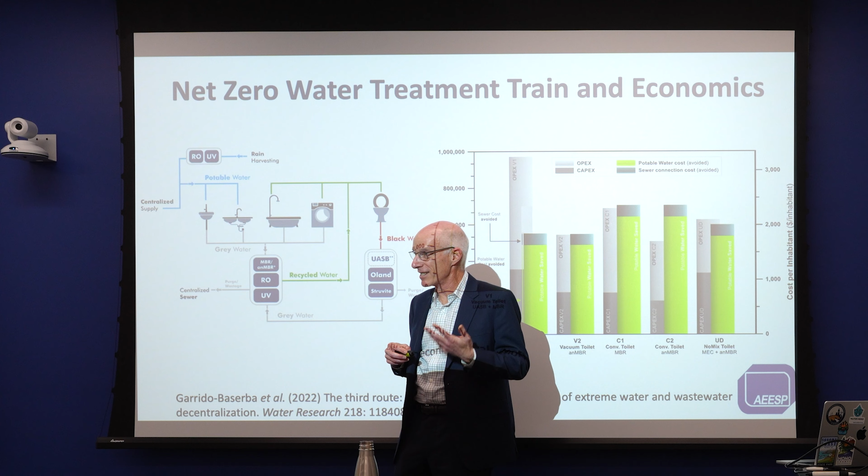And so people often get trucked water brought to their house, and they drink bottled water, or they take water out of these great big plastic containers as a way of living. So that might be a community that would be quite interested, because their expectations for water may not be what people living in a big city are.

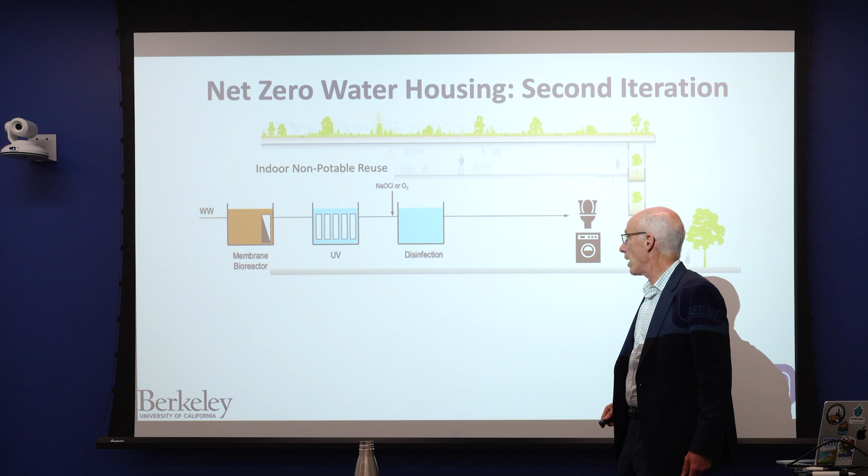And so I convinced Manel to work on another paper with me. This one actually showed up sooner than the other one, but it was this idea of net zero water housing, where now we could recycle water at the building scale and use it for showering and washing hands, and not just for flushing toilets and clothes washing. And in this first iteration, we assumed that the drinking water would come from either rainwater harvesting from the roof or bottled water. So we said, okay, let's not get that controversial yet, but let's do this analysis.

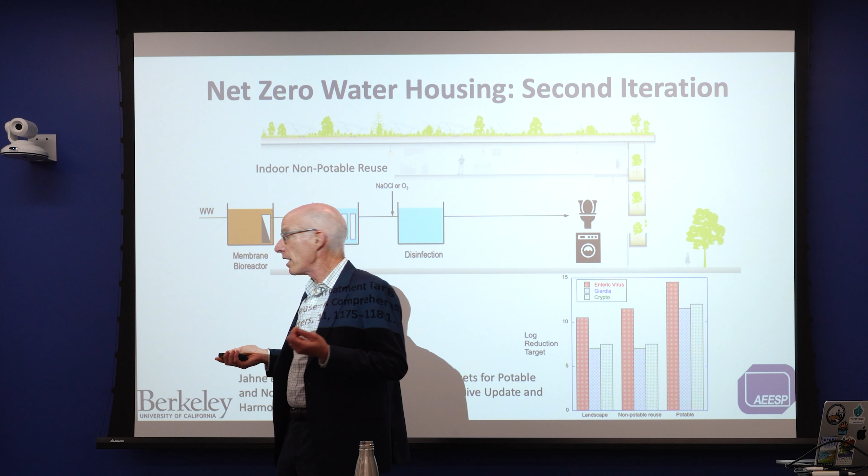And we did the analysis for a series of different size buildings, because obviously the roof to water demand ratio is going to change with the size of the building. And also one of the critical factors is what fraction of the basement you take up with this water treatment system. So in a single family home, it could be a quarter of someone's basement, and they may not like that. And so there's a sweet spot here. It turns out the sweet spot is in these low-rise buildings, which is probably the most common form of housing around the world in any case. So that was kind of nice.

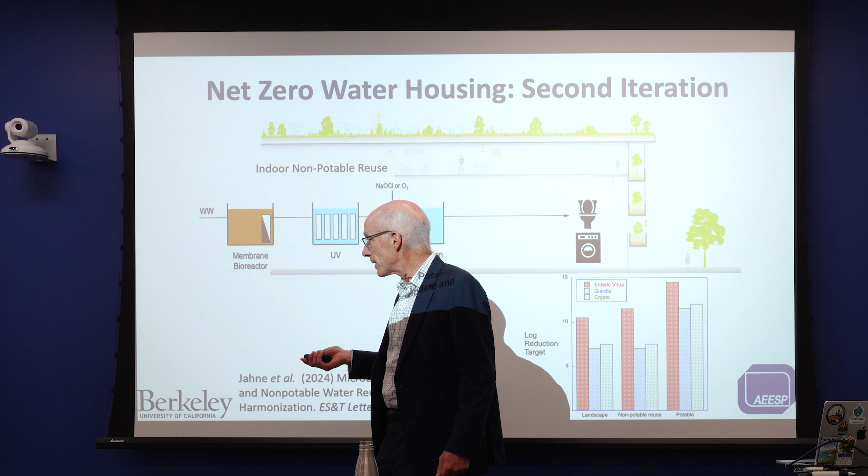But just to give you a sense of what's in that paper, we did the modeling of different configurations of water and wastewater treatment plants. It's got a supplemental information section that's about 50 pages long with all the different permutations that we looked at. So if you're a deep nerd and you like looking at these kinds of things, it's a wonderful paper. It took a long time for us to write and review.

But the take-home point here is that when we look at these different configurations of running this system, all of them come out with a cost that's less than what the cost would be of operating in the conventional mode. So these all have a predicted favorable return on investment.

Now, when I start talking about this issue with people, like in California, we have a lot of people who are still interested in these distributed non-potable reuse systems. There's something called the BUILD initiative, which has been pushed by San Francisco PUC and EPA as a way to go. And they're taking it slow by starting with non-potable reuse.

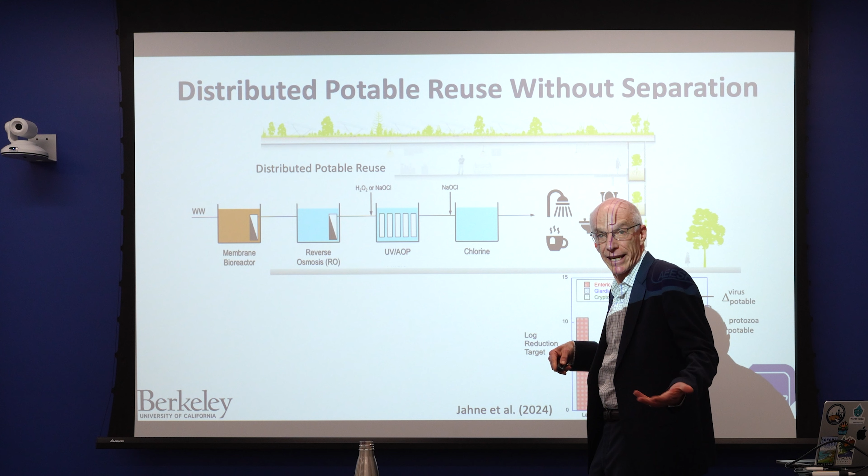But I always say to them, why don't we just go right to potable reuse from the beginning? We get twice as much water. And so just to give you a sense of those discussions, in our current iteration, the things we're thinking about are how we meet the standards for microbial risk in these systems.

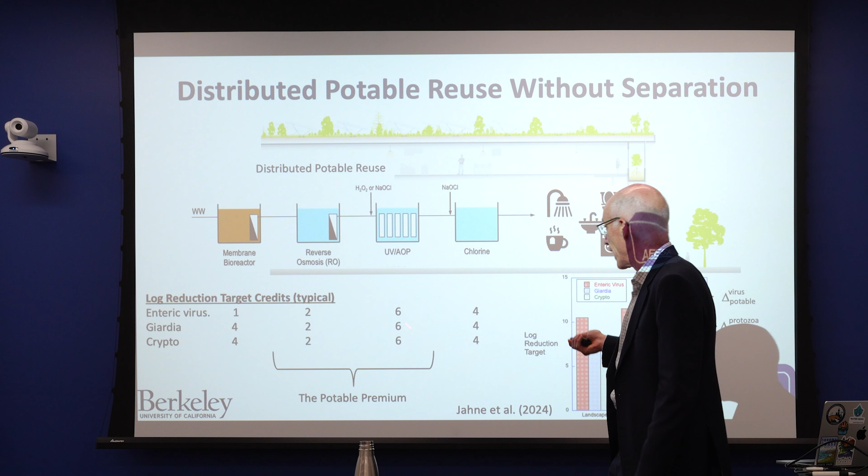And so you can see that this is the configuration of a distributed non-potable reuse system that might be used not in Salesforce Tower, but in most normal buildings that are doing in-building water recycling. It would really just be an MBR followed by a UV system for disinfection mainly, and then chlorination, and it would be used for toilet flushing and clothes washing.

And the way in which the public health people look at this is through microbial risk assessment, and this is a result of a microbial risk assessment led by a team at EPA. And what you can see here are these log reduction targets. So this is how many factors of 10 you need to reduce the concentrations of enteric viruses, Giardia and Cryptosporidium.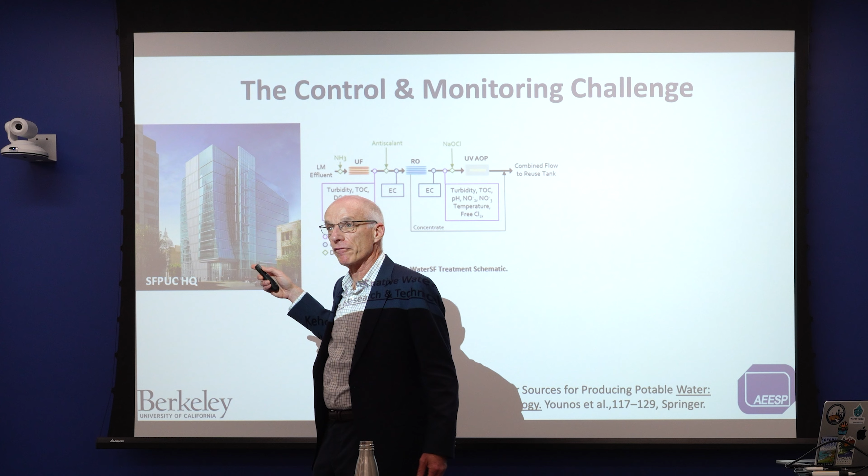And you can see that when we want to go to landscaping, we need to get some pretty high reductions because someone might breathe in the pathogens when it's being used for landscaping. If we want non-potable reuse like toilet flushing, we still need some pretty stringent standards because we aerosolize the water from the toilet when we flush the toilet, and we might have incidental contact with the water when it's used to wash our clothes, for example.

And then if we're going to use it for potable, these numbers go up, but they only go up by a few orders of magnitude. And so this is how our existing systems get these log reduction targets. We get a lot of log reduction credits for Giardia and Crypto, the big things, in the membrane bioreactor because of the filter. We don't get so much for viruses. The viruses come through, but we whack the viruses during disinfection, and we do get some virus inactivation during UV.

And so I've been thinking about if we made a system where we could do potable reuse, where in addition to the membrane bioreactor and the chlorination step, we put in reverse osmosis, like they already do in Salesforce Tower, and we put in a UV AOP, like UV peroxide, again, like they're already doing in Salesforce Tower. But this is the treatment train that's used at Orange County Water District for their potable reuse.

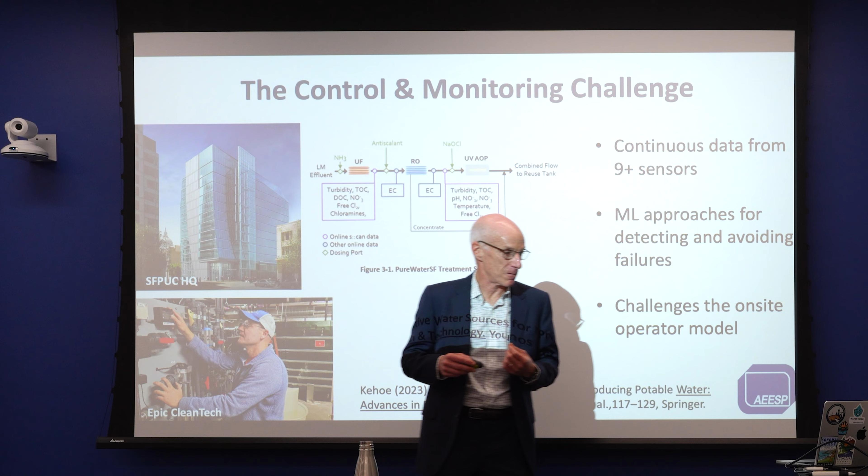And what you can see here is that we get 2 logs of removal, at least credit for 99% reduction of the pathogens in RO, and we get 6 logs removal in the UV AOP because the UV fluence is so high that we get excellent inactivation. And so I referred to this as the potable premium. So if you want to go from flushing your toilets to drinking the water, you just need these deltas here, these additional logs of removal, and we get them by putting in reverse osmosis and UV AOPs. So it should be technically feasible to drink water in our buildings.

And in fact, the city of San Francisco has already done a demonstration of this. They contracted with Carollo Engineers to build a demonstration plant at their headquarters in San Francisco. And one of the things I think about in terms of opportunities for environmental engineers going forward to use machine learning and AI is that these things need to operate in a semi-autonomous mode without an operator present. And so they're going to have tons of sensors.

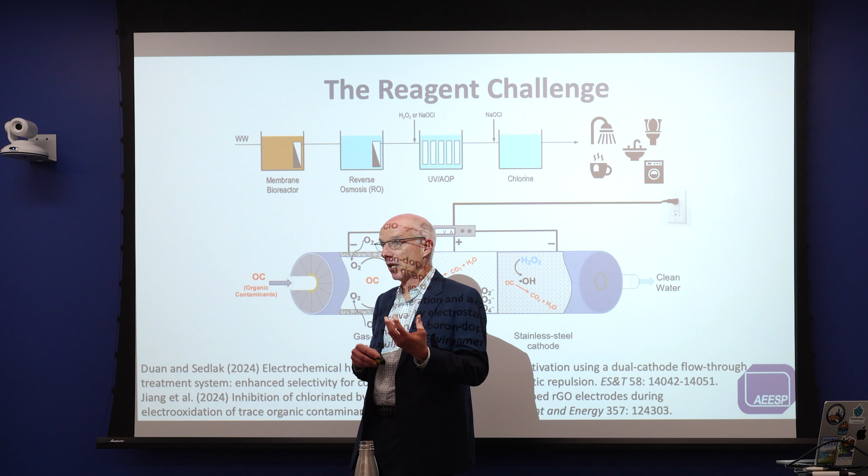And so you can see the system that they put in San Francisco and all the different control points where they have sensors. And those sensors are paired with actuators that control and regulate the operation of the system to ensure that they're operating properly. And so this kind of thing and proving that it works is pretty important. And so again, continuous data from about 9 sensors. And machine learning approaches are being used for detecting and even anticipating the failures in the system and operating it.

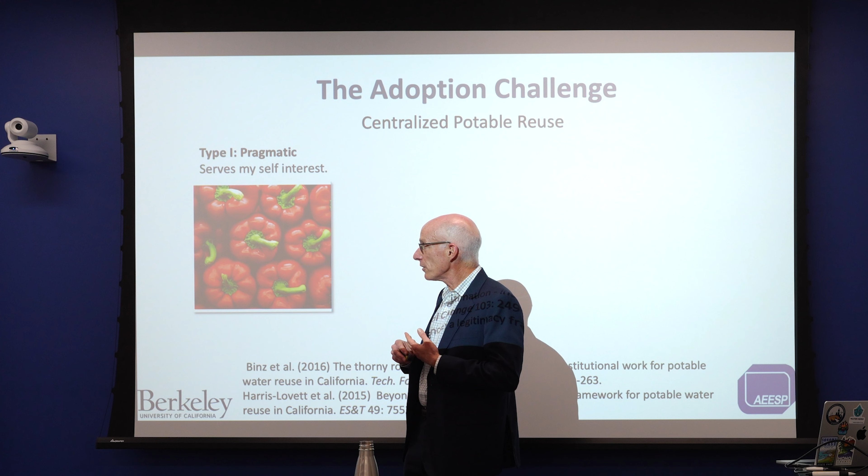And it really challenges the idea that you need an on-site operator. And that's important because in our current systems, we have a requirement for an on-site operator. So this is one of the on-site operators from a company called Epic Clean Tech, posing for a photograph in front of one of these in-building water recycling systems.

Because in reality, this fellow sits at a desk looking at the output of the sensors and could be sitting at a desk just about anywhere in the world as long as there was a technician who could reach that, or external valve could be actuated to take the system offline.

And that's the other thing I didn't mention. All of the examples I've shown you are within existing water systems, and you can just throw a valve, and so if the system's malfunctioning, you bypass the recycling system and you bring in fresh water and you send the wastewater to the sewer while you're repairing it. You also get water for firefighting from that centralized system. So they exist as hybrid systems. Maybe not so much in Bangalore.

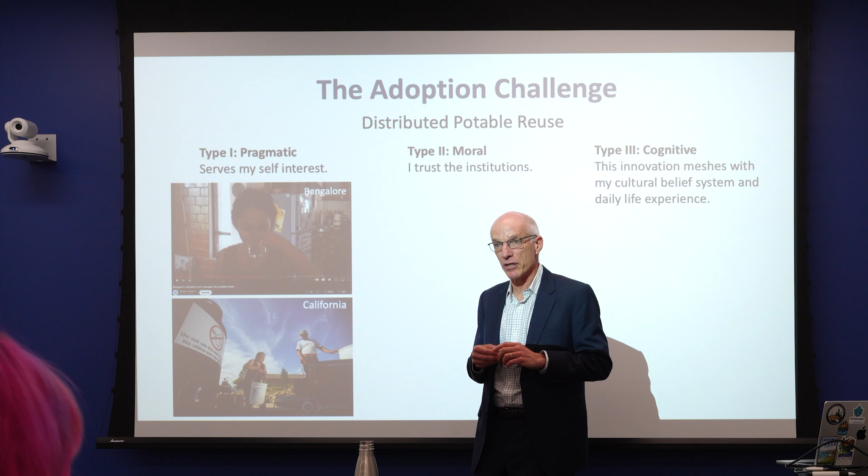So in terms of, I tried to think of opportunities for environmental engineers in this space, and one of them, I think, for people who work with electrochemistry, say, is the challenge of reagents. So I showed you a system that had chlorine and peroxide. If you want to make a building manager nervous, you tell them, I want to bring a strong oxidant that can also kill people into the freight elevator and store it in the basement. Is that okay with you guys? No, not so good. And so if you're thinking about electrochemistry, you can make hydrogen peroxide and chlorine as needed or in situ with electrochemistry.

And a lot of our work in the past few years on electrochemical water systems has been thinking about how to make modular, three-dimensional electrodes that can generate reagents and take advantage of known chemistry to achieve some of the same goals. And so these papers are looking at this combination electrode where we had a gas diffusion cathode where we made hydrogen peroxide, an anode where we did the oxidation reaction, and then a cathode where we converted the hydrogen peroxide into hydroxyl radical. And so you can do the same thing that the advanced oxidation process does without filling the freight elevator full of a strong oxidant.

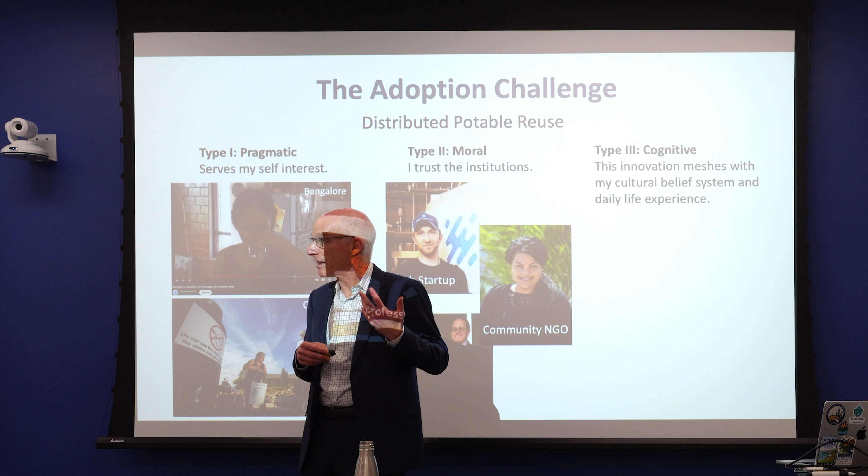Another opportunity for research is on this question of adoption. And so I told you about my earlier work with Christian Binz. This is some of the work that we did with Christian on centralized potable reuse. And Christian taught us about the three types of legitimacy that water systems can achieve. The first one is pragmatic, where someone realizes that the water system is in their best interest. So in the case of a centralized water system, if the public sees that this is creating a resilient water supply, so they don't have to have brown lawns someday, this is viewed positively.

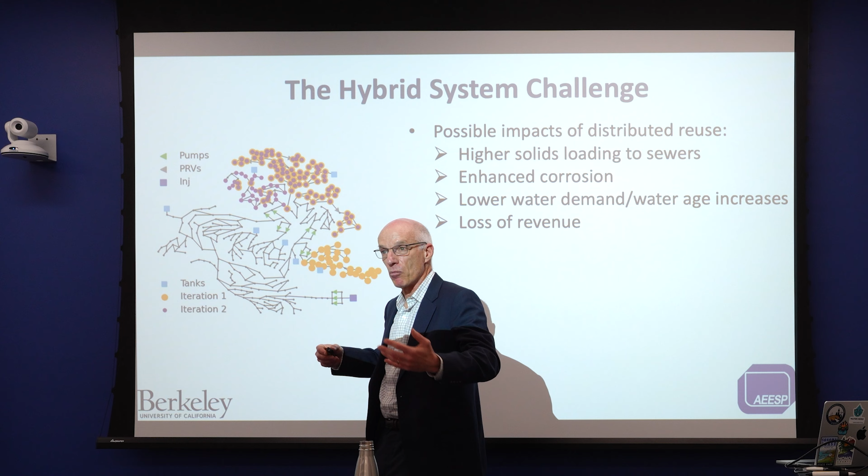If people trust the institutions responsible for regulations, that is, if there's transparency and there's a regulatory system and a utility that people trust, legitimacy builds. And if people have the experience, the cognitive experience with recycled water, the apprehension is reduced. And so when you go to Orange County, the local county fair, they're always giving out bottles of the recycled water because it tastes much better than the water that you get in some places where it has high ion composition, like the Colorado River, and people in Southern California really love it.

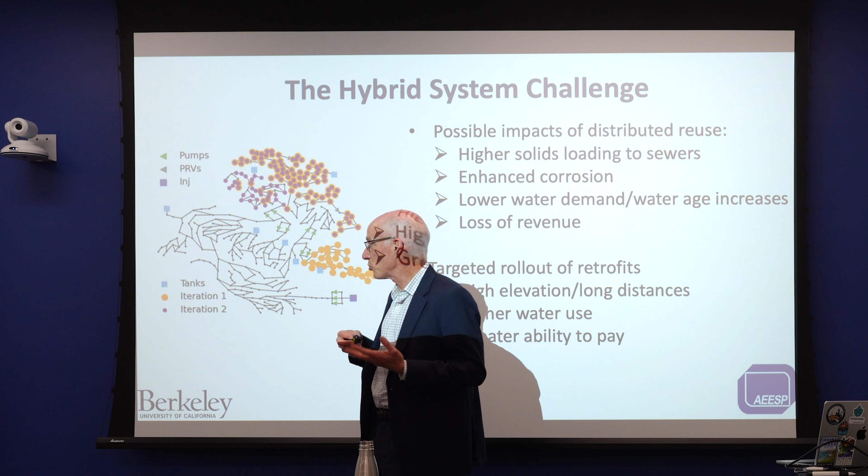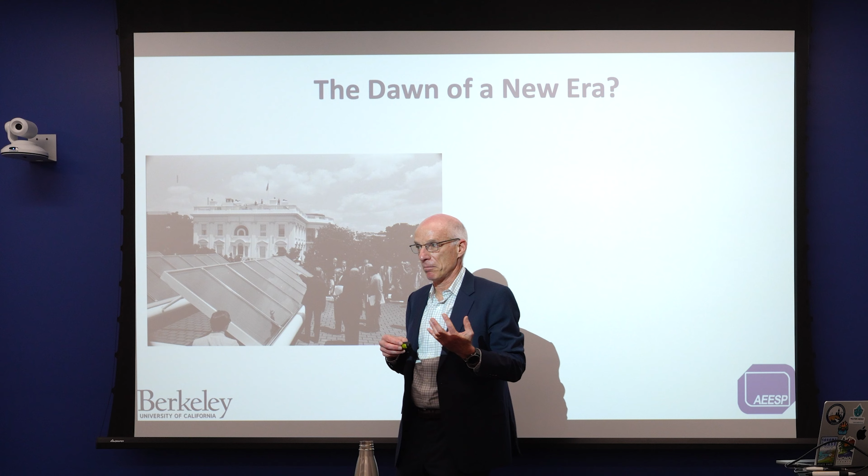And then I think that, I mentioned this idea that these systems exist in operating centralized water and wastewater treatment systems. And there's some really interesting questions of operating hybrid systems and the challenges they face. For example, when you think about it, it's a little like the problem that we had with rooftop solar.

As rooftop solar expanded, it challenged the business model of electrical utilities, and it caused some problems to them, and also the operation of their system. And so in the case of water systems, if this catches on, and it's more than a few percent of a city's water, we'd probably see higher solids loading to sewers, and that can lead to enhanced rates of crown corrosion and other kinds of problems.

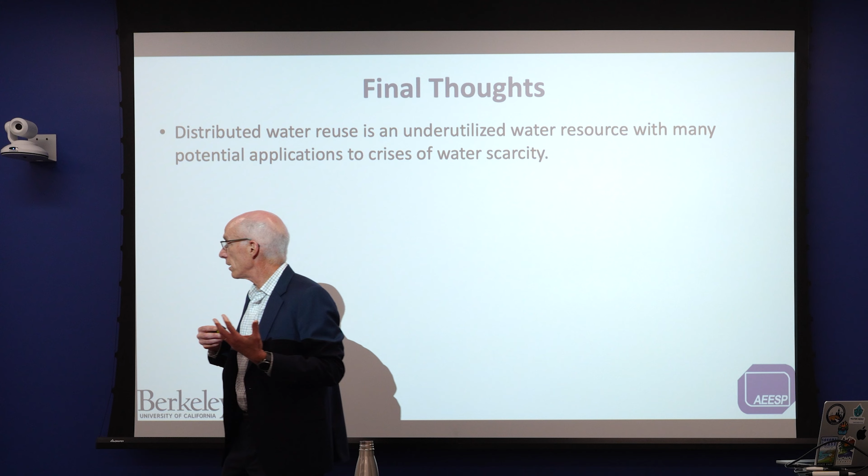We could see lower water demand from the water distribution pipes, and the longer that the water spends in the pipes, the more disinfection byproducts build up, and the more likely you are to have zones that lack a disinfectant residual, and also there'd be a loss of revenue for the utilities. And so these are challenges that have to be addressed if this is going to scale.

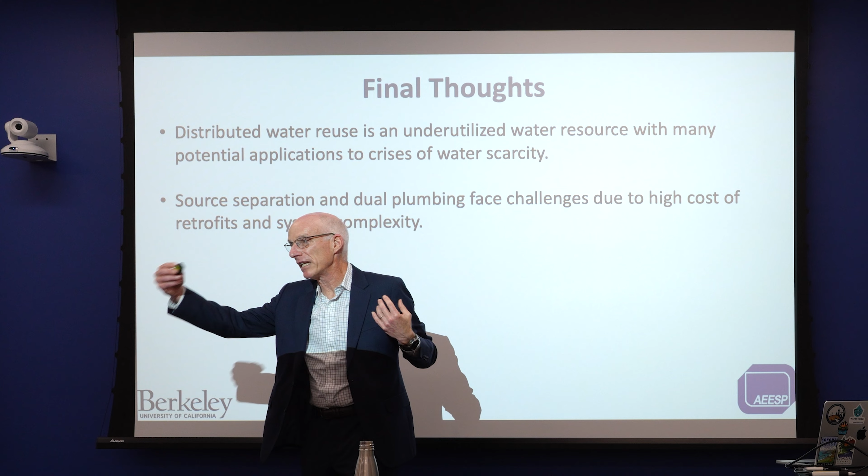And then I think that one of the things to think about is maybe it doesn't happen everywhere in the city. Maybe you target parts of the city where you have high elevation, where you're already using a lot of energy to get water up a hill. Or maybe you target places where there are high water use and more of the water is used outdoors for landscape irrigation. Or you target places where there's greater ability to pay, like San Francisco did by starting with the downtown businesses who don't mind being part of that.

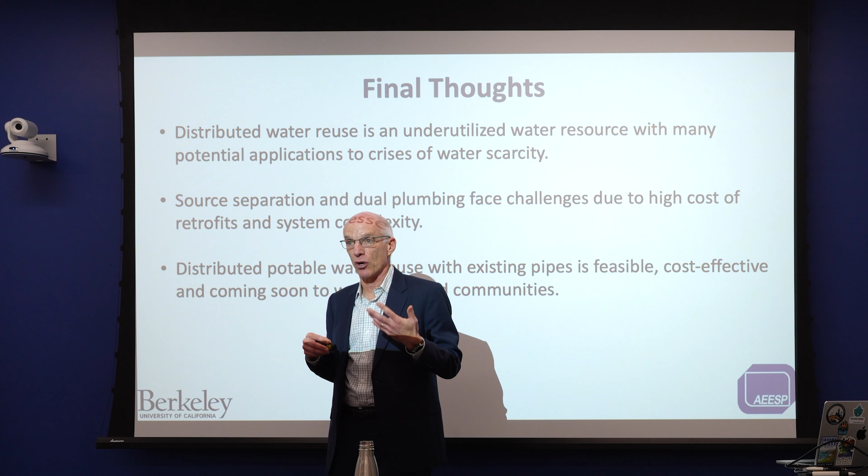So, Jimmy Carter on the roof of the White House was the start of a new era, but it took something like 40 years for that to scale up and become obvious to people. And I think the beauty of it is not so much that initial idea, but all of the engineers and scientists and social scientists and policy people who made this possible. And I think for us as environmental engineers, we see the same place. We're kind of at this place where we were in 1979, but with distributed water systems. So it makes tremendous opportunities for us.